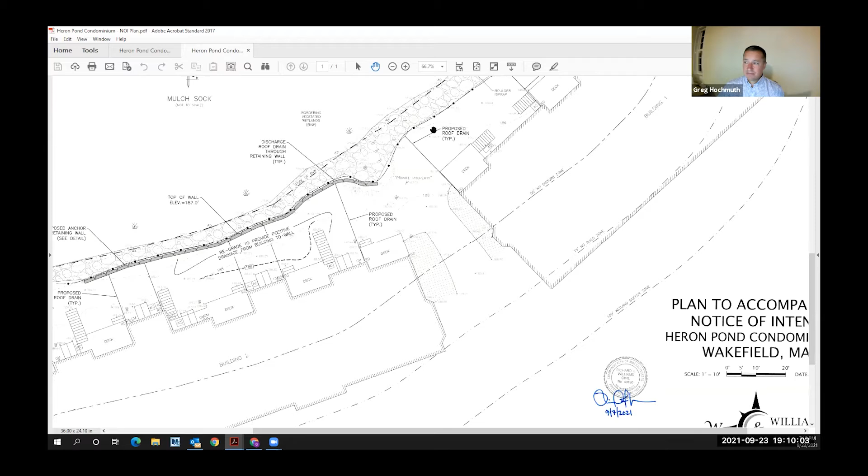So when you regrade, are you starting at the BVW and grading back to the house, elevating as you go? No, we won't be close to the BVW. We'll be close to the top of the wall, but the BVW boundary is pretty close to the toe of the wall where it meets the water in a normal season. So all of the work will be within the existing lawn area.

Will you bury the downspouts and have them daylight at the filter fabric area? Yes. So if you walk behind these buildings post-construction, you'll see the downspouts going into what looks like a subsurface infiltration chamber, but they'll just enter a pipe that extends out to daylight just before the wall. And how close to the BVW is that new wall?

Good question, let me zoom in a bit so you can see. I don't think I can annotate, but I'll use my pointer. So 50 feet from the wetlands is this line that cuts through the building. We're probably within 8 to 10 feet at the closest point, with the wall right here, set back just from the top course of the existing boulder wall that surrounds the pond.

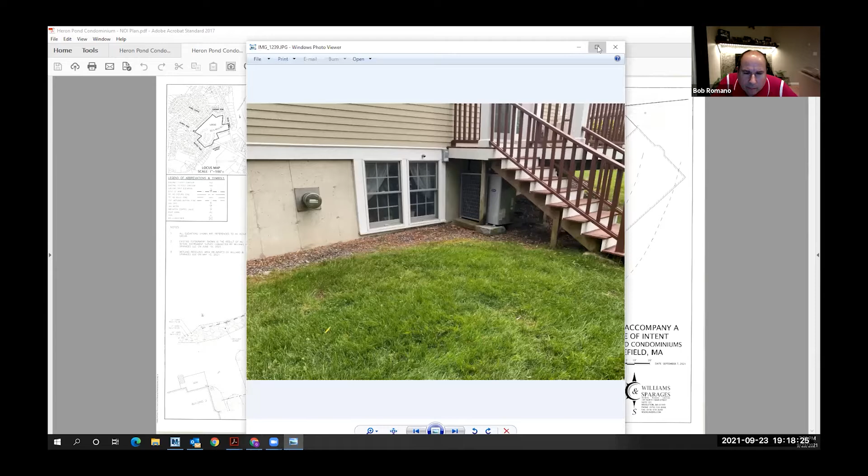Where on that drawing roughly is that picture taken from? This is a good one showing how it pitches back towards the windows. This is higher here and it's lower here. And at one point in time, the stone probably drained a lot better than it does today. Over the years it's probably got gummed up.

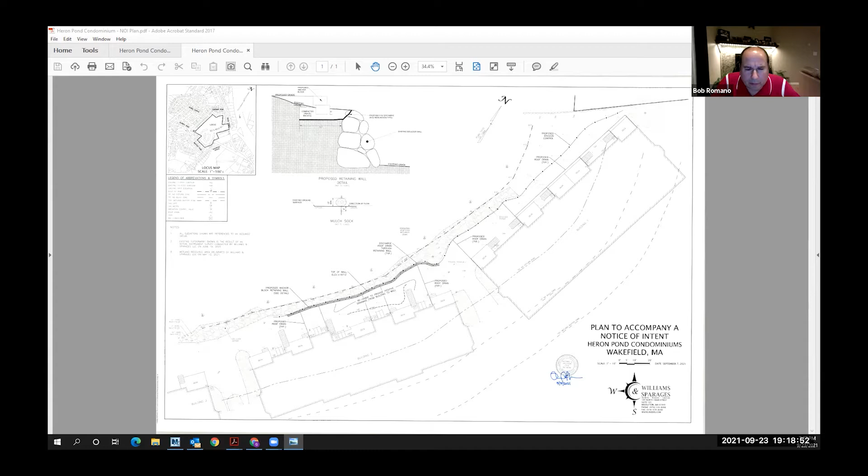Just going to keep going through these photos to see if I have a better one. So Greg, are you gonna take that high spot and move it, or what's gonna happen? So where we just saw that mound in the photo, that's gonna be flattened a little bit. We're not going to be cutting anything, we're going to be putting the wall in close to the existing wall and lifting the grade up a little bit. That'll allow us to kind of flatten out that area and make the slope uniform back to what it was.

Yeah, so it's going to be perfectly even until you get to the new wall. It's going to slope subtly away from the buildings. That's the idea - just get the water away, put the downspouts into a pipe, and daylight them closer to the resource area.

What erosion control measures are you proposing? So we wanted to put in a 12-inch diameter mulch sock, because we've had really good success with those. They bind to the ground. Straw wattles, in our opinion, don't work - silty water goes right through them. But this is going to be a pretty quick project. The company doing it will be in and out very quickly.

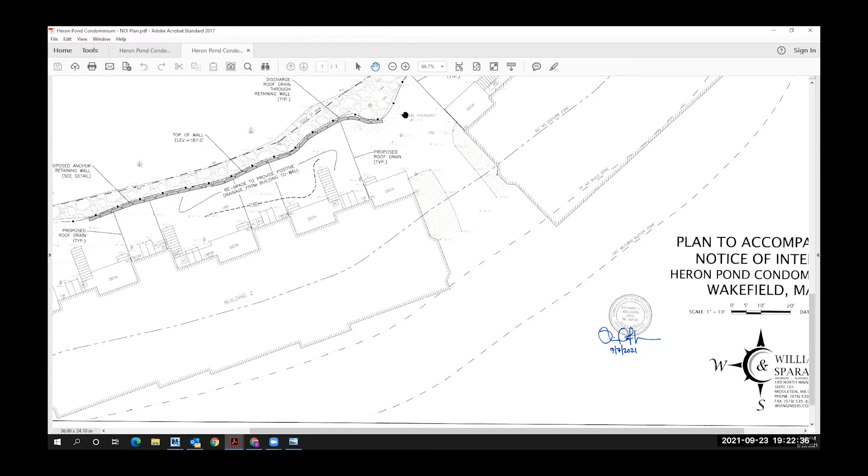There's going to be little trenches through there too, to bury the pipes for the downspouts. And how long a term - this has the potential, if we get some rain, to make a real mess. So how long do you think this would take? Oh, this will be done in less than a week, and the erosion controls will be in place to protect the resource area during construction.

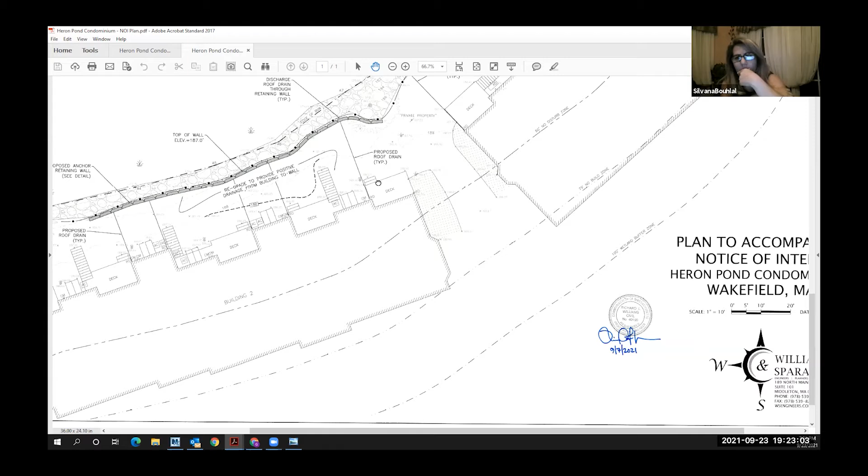I have a question. This retaining wall - if this is the remedial issue for this area, how is it not the case that the other buildings will eventually do the same thing? Or is it not? Is it going to be pretty much the same? Good question. I have a picture behind the other building, and I think you'll see it's much different over there.

I just want to show you behind that building you were just asking about.

As you go down this way, see how the wall stops? About a third down the building. And then the grade is just fine. This is in great shape over here. And that's the photo I was just showing.

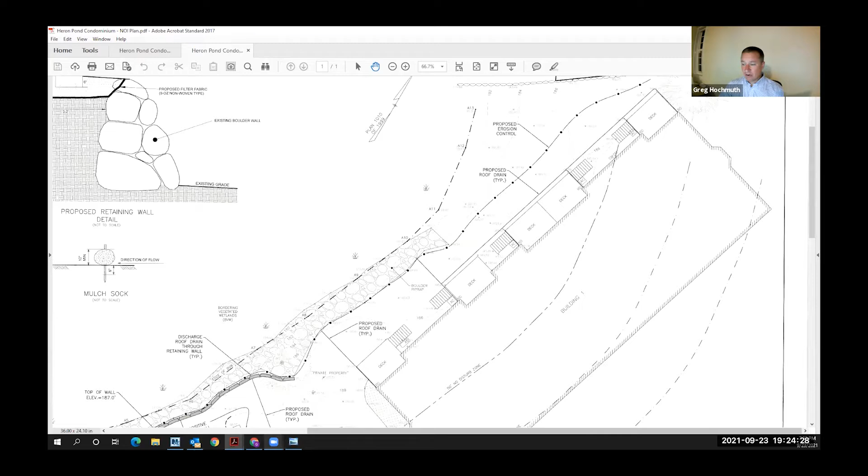Greg, how are you anchoring the erosion and sedimentation controls to the top of the wall? Yeah, so that mulch sock, the beauty of it is it doesn't require any anchors, stakes, or anything. Once you get a rainstorm, it's tough to lift that. It's heavy, and it binds to the ground.

A lot of people, after the project's over, if this was in the woods, we'd probably propose to just cut it, remove the fabric around it, and spread out the mulch. We can't do that in this location. They'll just cut it in sections like a sausage, twist it up, carry it, and remove it off site.

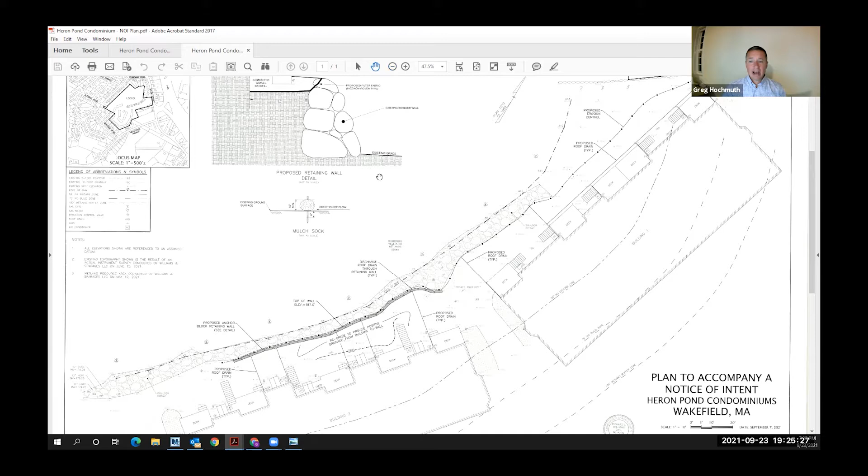This erosion control doesn't need any type of anchor. So it's going to be placed on the rock itself? Just in front of it, on the grass in front of the rock. Because remember, our...

But it looks like you're putting some fill right behind the wall. How, are you gonna? Pretty close to it. But the erosion control will bind, whether it's a rock or grass, whatever it's on top of. Nothing's gonna go under that once you get one storm event.

I don't understand, Greg, why you're building up the wall if you're trying to get the water away from the house. Because right now it's too steep. We have to add material back there to make it uniform and flat.

It slopes down. How can it be too steep? What, the existing lawn is too steep? Yeah, the wall has settled over the years. So when you come off these decks and steps, it's a very steep slope down to the wall now, and it wasn't that case when the development was first built. It's sinking. The wall is sinking.

How do you know that? Just from walking behind the building. I mean, it's grass now. It's going to be grass after the project. It's a buffer zone project. From our point of view, it needs to be done. It's a pretty minor project. They're not building anything new with the exception of this small wall.

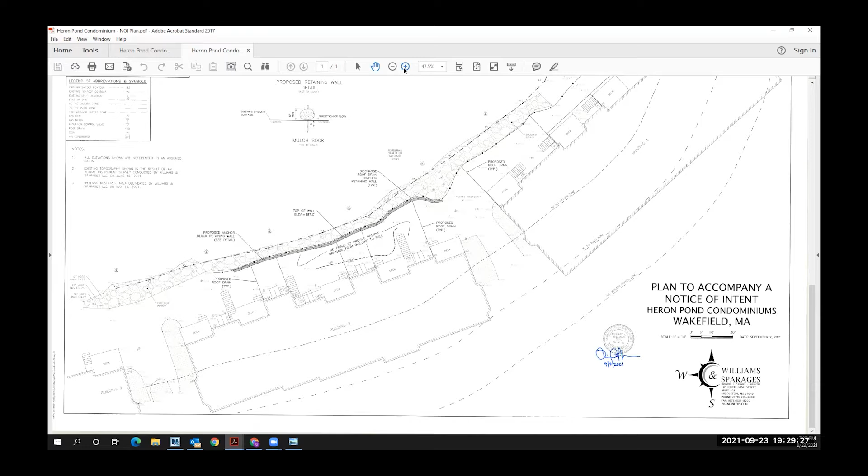Okay, well, you said you're getting water in one of the units. You must have to get it graded back to the foundation there. Where is that low? I'm sorry, I can't hear you. I said, you must have to bring some of it back to the house, change the grade at the house because the guy is getting water in one of the units. I don't know which unit it was. Well, that's why we're extending the downspouts away from the building.

I think getting the roof runoff away from those low points that are right up against the foundation - that's probably the culprit with the property owner that was experiencing some flooding in their unit.

So you think it's really from the roof runoff? Yeah, I'd say just about every unit behind this building, there's little pockets next to the bulkheads, the AC units, under the deck, where everything's just a little lower than the grass. I bet the stone used to infiltrate, now it's just not.

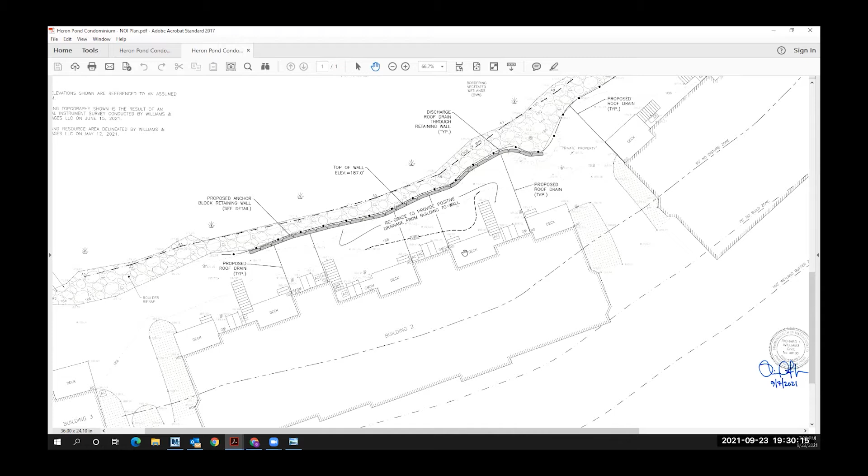I just ask, why not just extend the downspouts? If the issue is with the water getting too close to the houses, I don't understand why you need to bring in the soil and build - I mean, other than to stop that settling, I guess. But it's not to take water away from the house.

But why do that, again? You're in a buffer zone - I want to hear why you think that's better. Well, I don't think it's worse for the resource area. I think it's better for the property owner to be able to use their backyard - at one point in time they could a lot easier than they can now. It's lawn now, it's going to be lawn post-construction. Impact-wise to the resource area, I don't think there is any. I think somebody would be hard pressed to tell me how this is going to impact the wetland.

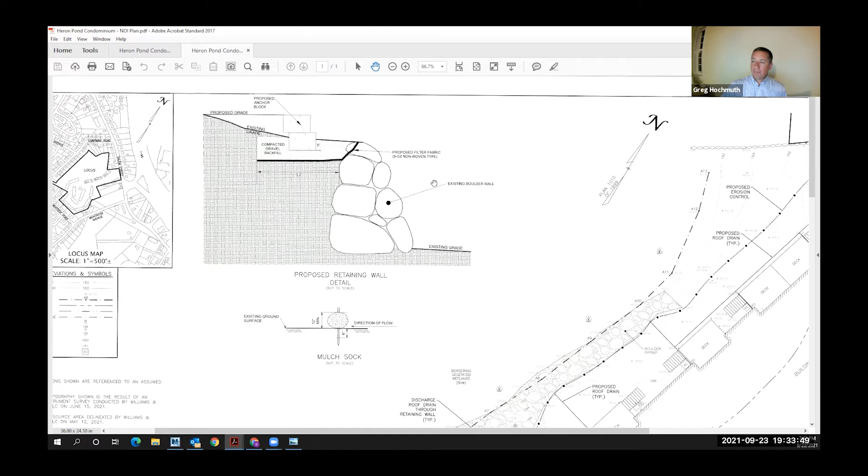So the way this is drawn, it shows the filter fabric going - really the filter fabric is gonna go up here, and this is just a generic detail. The erosion controls will go somewhere in this location. They won't be working beyond the erosion controls. It varies along the entire length, but if you look in plan view, we have the erosion controls shown as the limit of work, and we won't go beyond that limit of work.

Okay, because it seems like you're filling right up to the wall. I just don't understand how you're going to put those erosion controls in and then fill underneath it? No, the erosion controls are going to go in, and there's not going to be any work on the wetland side of the erosion controls. All of the work will be on the building side of the erosion controls.

No, I understand that. It's just that it looks like you're filling right up to the wall on the development side. I just don't understand. Could you provide a detail on how that's going to look when you anchor that in?

I know the generic details. So we have a mulch sock detail right here. Right, but that's just a generic plan on a flat piece of land.

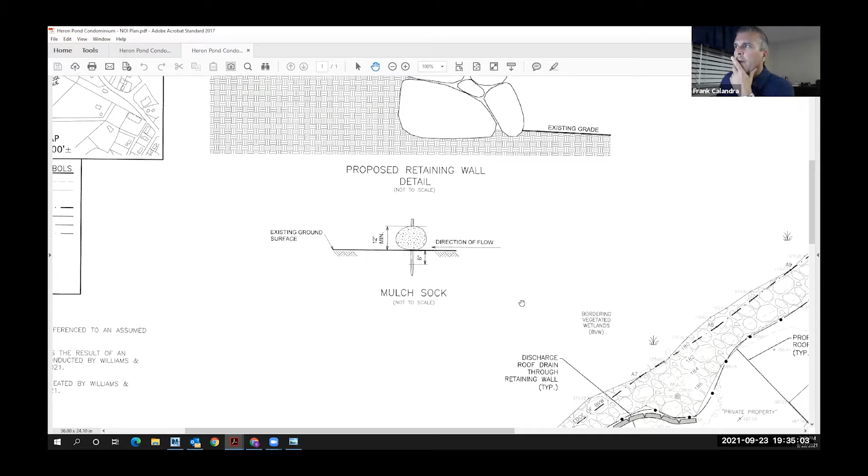I just want to see how it's going to integrate with the wall as you're going to anchor that in right at the top. Is that the plan? Because then it looks like you might not have enough room to do your erosion and sedimentation control work in this place. So if you go up a little bit to your proposed detail.

So the detail, this isn't to scale or anything, this is just to show you there's going to be no work beyond the erosion controls. I know what your concern is. They're going to put the erosion controls in, and any excavation is going to happen on the building side of those erosion controls.

Which is the indicator of the erosion control on your plan? You've got two lines there. It's the line with the black circle. Okay, so aren't you putting that right on top of the stones? In some spots, yes. So how, you really can't anchor it according to that detail.

I think that's what Frank is thinking about. But you don't need to, you've seen mulch sock before, I'm sure. You don't need to anchor it. We don't like mulch socks, we like hay bales. Well, we'll put hay bales in, but the mulch sock will work so much better here. Yeah, I'm just saying, it depends on the situation.

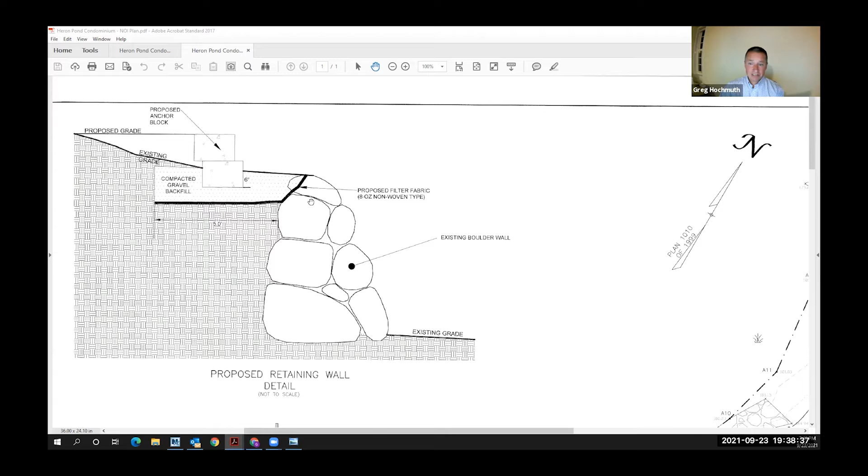You really can't do trench silt fence here, because you'd be trying to trench it into rock. And the straw bales, in my opinion, the mulch sock would be better, but if this commission would rather see straw bales - no, I was just putting that out there because we decide what we're going to use based on the type of project. Some projects are better with hay bales than others, that's all that statement was about. I think it's appropriate what you're doing.

I don't see anything. Yeah, I think our only concern really is the interim potential for sedimentation runoff while the lawn is being reestablished.

Yeah, I was wondering if there's a way you could sequence it so you don't have as much exposed until you get the wall built and then come in and grade, would that be feasible? Well, it's gonna be pretty quick. In less than a week they're gonna have this thing done. It would make sense to kind of do it all at once, just to get it over with quick.

Yeah, but if there is some concern, a lot of times what they'll do is hydro seed with a tackifier, or after they seed, they'll put down some straw over the seeded area to act as a tackifier. That helps knock down velocity, and if you get an above average storm event, it helps keep the loam in place so you don't get rilling. But remember, this is a pretty flat slope we're creating, so it's not going to be a steep drop off down to the wetland.

And what time of year were you going to do this? They want to do it as soon as possible, to take advantage of... well, we're running out of time, right? It looks like it.

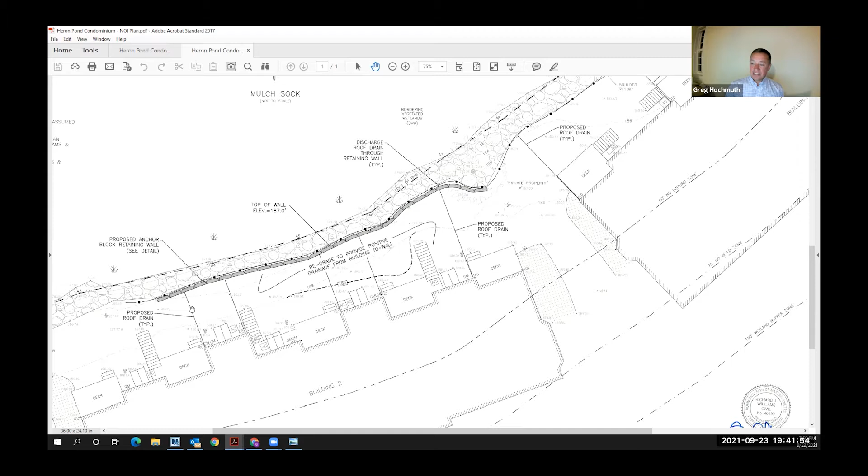We may have an as-built, this was like 2001 or thereabouts. It'd be interesting to know what datum they're on, because it may be a different datum than the one we're showing here. I think we're on NAVD 88. Yeah, that's what you should be on.

And we may have revised floodplain too, right? No, there's no floodplain here. There's no floodplain here? Okay, good. Let me just double check that. Yeah, surprisingly there's no floodplain associated with Heron Pond. There will be someday.

Well, there is an invert elevation. Yeah. Any other questions or requests? No, I guess not, right? It sounds like there isn't anything reasonable you want to see.

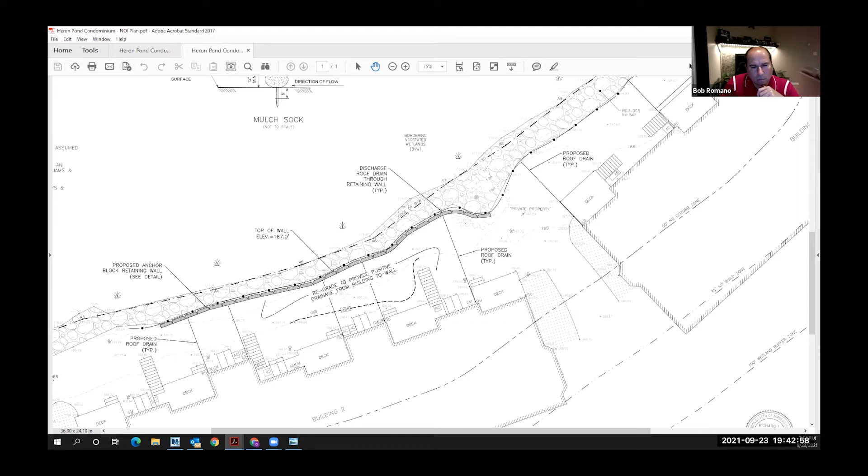Is the height of this wall gonna vary throughout this thing? Are you gonna have some more blocks than others? Yeah, as it tapers off towards the ends it'll go down to one block, but we've got the top of wall set at 187 for the entire length, which is about 1.5 foot above, you know, 1 to 1.5 foot above the existing top of boulder wall that's there now.

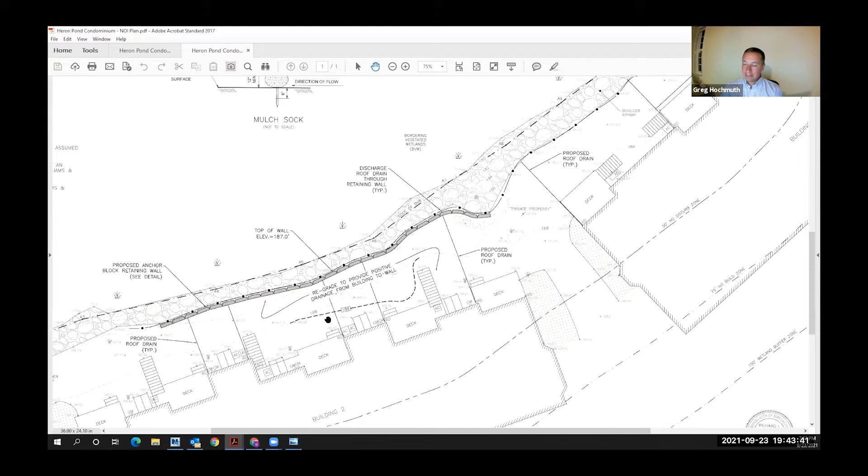If you just dumped loam there and tried to stabilize it, you'd get more settling over the years. You'd need to bring it up that 1.5 foot to 2 feet. But I don't know.

The filter fabric we're putting down below the gravel base should help any settling below the new wall. Shouldn't it be done settling by now? It's been about 20 years. So otherwise you're putting the wall in an area that's still settling, and if you don't know why it's settling, it's just going to keep going. That was the problem, right?

To figure out if it's done settling or why it's settling is a huge undertaking. Now you're talking about dismantling that wall along the pond. I think we have an as-built of that, and I bet we have a top of wall elevation for the existing one. I'm going to have Elaine look at the records to see how much it's really settled, if we're able to get that information.

What you're not going to see is all the pits and mounds when you walk behind that. It sounds like you're trying to smooth it out and just regrade it. Yeah, for the most part. It's not a big deal.

It's just the proximity to the wetland and the chances we're taking that we won't get heavy rain and make a real mess. A lot of commissions require a monitor if there's a predicted above-average storm event, or anything over half an inch within 24 hours, where they go out during or after, with emergency erosion controls on site, so if there's an issue it can be addressed right away.

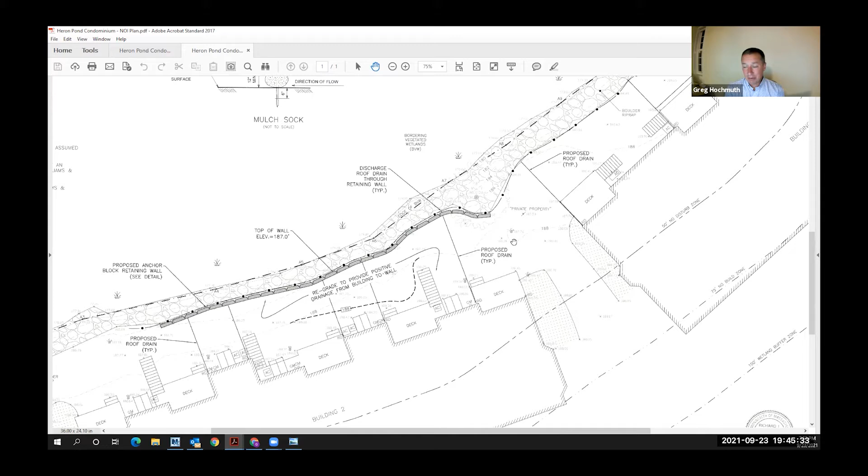This is going to be about a week to complete. You might have one storm event, you might have none, but having that required in the order may make sense here.

Any other questions or comments? I think I understand what he's doing now.

Are there any requirements we want to come back with in two weeks, October 14th? Next meeting, I believe. Is there anything we're looking for drawing-wise? I'm going to fix our detail. I want to ask Elaine, because she knows this project very well—we were both out there while things were happening, and she might remember or know where to find something.

I'll look through the files for the as-built plan and get the elevations.

Are there any questions or comments from the public?

If you're in that area too, it might make sense to just pop in and take a quick peek. It won't take long to see what we're trying to describe in those photos. That's not a bad idea.

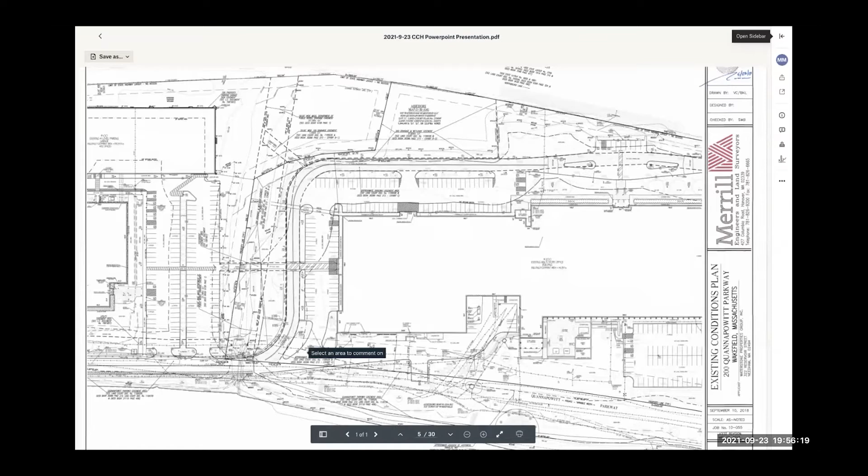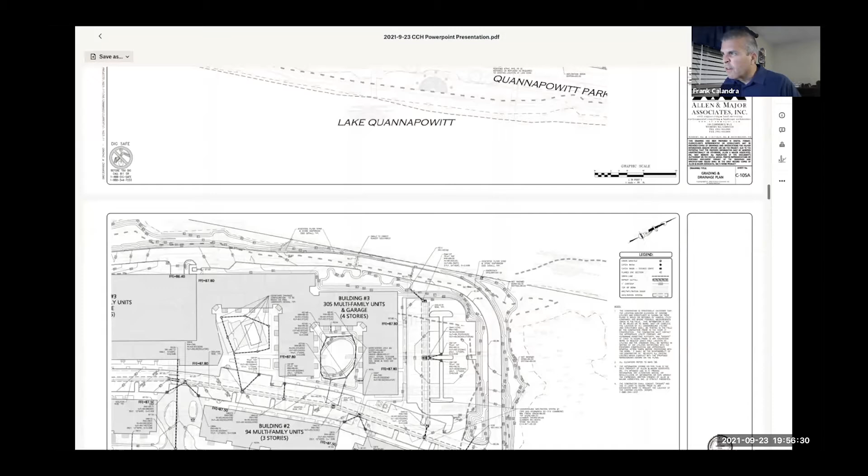You're not showing the right area of the drawing. If you go more to the left, there are wetland flags shown on 50 Quannapowitt. We can't accept a plan that has wetland flags on a different property.

Okay, we could - I'll talk with Nick and see if he's okay with removing some sheets from the plan, or you can put a condition in the order of conditions saying you're only approving the wetland lines on the site. We'd rather have it off the plan, it's kind of misleading. Okay, yeah, I'll talk with Nick, see if he's okay with that.

I apologize, what's the sheet number we're referring to here? Is it sheet one, EC01? Sheet one, sheet one, existing conditions. Exactly right.

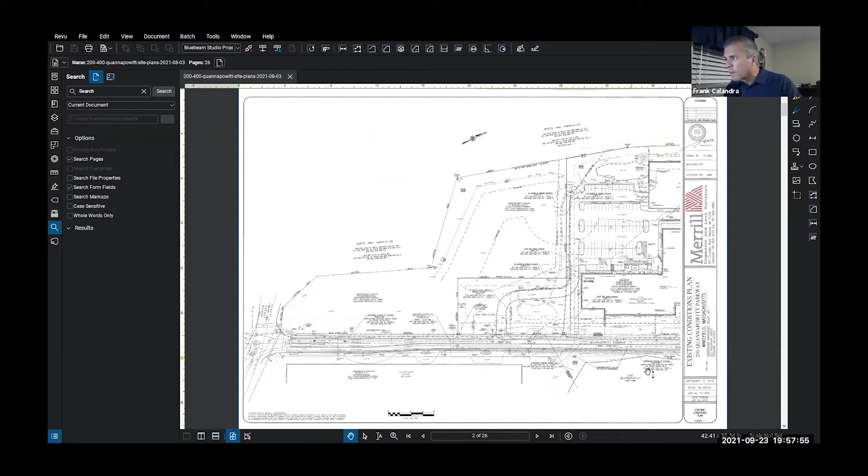I didn't have it in my presentation tonight, so I can't show it. Just for the sake of this conversation, do you mind if I bring that up really quickly? Let's see, I think it is this one. So if you look down here - I don't know why this is jumping, but it's right here, can you guys read it? Yeah, we can see it. So this is the other project that was in front of us not long ago, 50 Quannapowitt Parkway.

It looks like the site isn't even on this plan at all. I think you can delete this plan entirely. Yeah, I think it's totally extraneous, there's no reason why we need to have it on here. The only reason it would have ever come up is these sites were all created together, and Beal had a survey that was originally based off of. As Mitch mentioned, for other purposes it's relevant to have the utilities, but for these purposes there's no relevance to those sheets. Okay, we can remove those.

I just wanted to help Jim make his point there. Thank you. Yeah, thanks for bringing that to our attention.

So I'll share my screen with the site that we're going to talk about. Mitch, you're muted. Sorry about that, I'm not sure why, for some reason at this Wakefield Concom Zoom meetings, they make me hit an extra tab telling myself that I need to be able to speak while I share the screen.

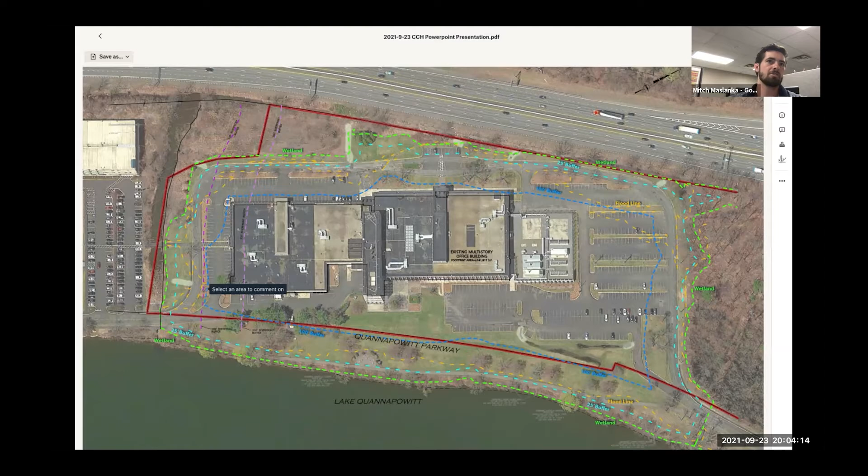And within the 25-foot to 100-foot buffer zone, we have 1,000 square feet of degraded surfaces, which doesn't actually sound right, so don't take my word on that one. But regardless, there is quite a considerable amount of degraded surfaces within the buffer zone at the moment, and the proposed project is proposing to reduce those degraded surfaces within the 100-foot buffer zones.

Other work proposed within the 100-foot buffer zone are the proposed building structures, portions of which are going to be up in this area right here. Within this landscaped island, there's going to be a building footprint, and the reconfiguration of the parking lots here will result in a landscaped island here, but some impervious surface here from the building.

Over here, there's a similar instance with the parking lots to the right of the screen, where these landscaped islands will be reconfigured so that there's less degraded surface in the parking lot and more landscaped islands and vegetation instead of impervious surfaces. So I'm going to scroll down.

This is our proposed plan, so you can see more clearly what is going on with our proposed buffer zone. Like I said, building here, reconfiguration of the parking lot so that there's more green space here, building footprint sneaking into the 100-foot buffer zone here.

And then in these areas where there's lawn space, and lawn space here, and lawn space on the outside of Quannapowitt Parkway, those are proposed to become our wet basins to manage stormwater runoff from Quannapowitt Parkway. So runoff is going to flow from the parkway into our best management practices, that being the wet basin, to manage stormwater before it reaches the BVW.

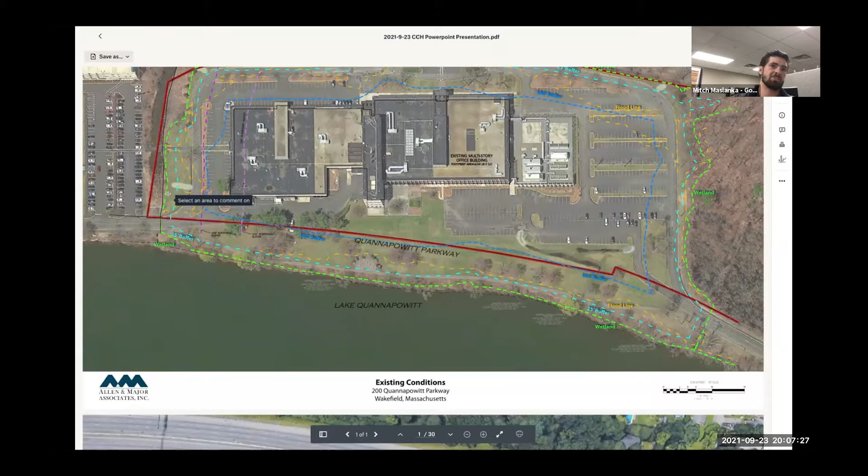...that the paved swale actually extended into the BVW and was filled with 6 to 8 inches of sediment. So over the years, stormwater has taken sediment from the parkway, parking lots, and landscaped islands, and has flowed down those swales and filled in the end part of those swales. Same instance over here - this was paved basically right up to the wetlands. But right now, you wouldn't know that without digging a test pit.

For these other areas, I didn't pick up on any asphalt swales here, here, here, or here. It was just dug ditches, basically, that carry the stormwater into the wetlands in all these shaded areas.

You had asked if any remediation or restoration of the wetlands would be necessary after all those years of sediment being brought in there. After checking out the site, I would recommend that no restoration be done. The vegetation is quite dense and honestly thriving in those areas. The biggest concern would honestly be the transport of that sediment and the nutrients to the surface water that collects in the wetlands and eventually makes it to that intermittent stream, ditch, and then eventually over to here.

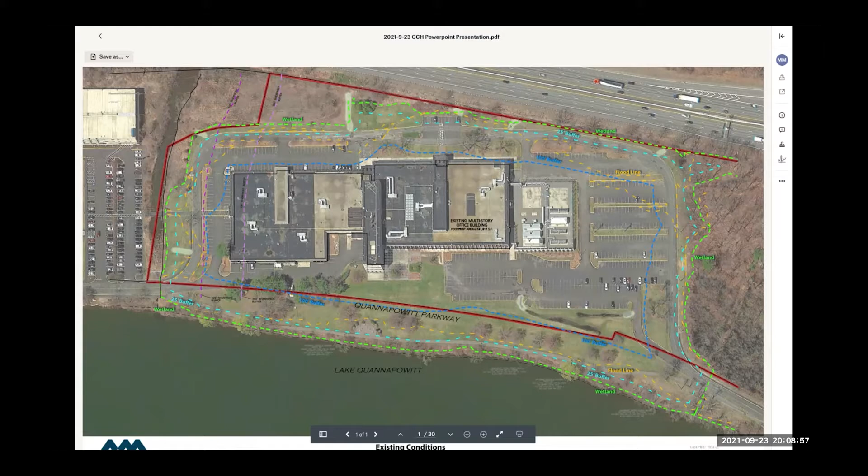So what would stop that is our stormwater management infrastructure proposal to turn these areas more into wet basins than swales, preventing sediments and nutrients from flowing right into the wetlands.

So I'll go back to this one.

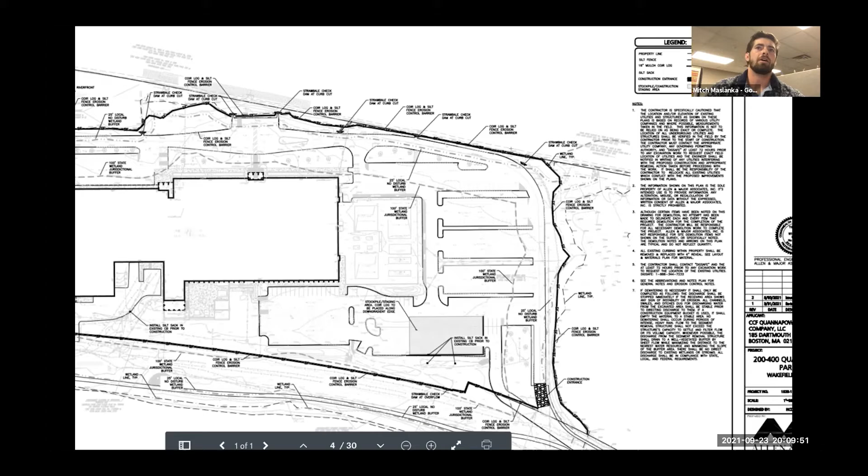Here is our site plan showing our proposed limit of work. As you can see, we have silt fence and coir logs proposed along the wetland boundary, going just outside the wetland boundary and extending all the way around the site. That's that dark black line - our silt fence and coir log for erosion control during construction so that there's no sedimentation.

getting into the wetlands. This is silt fence and coir log as well. We also have these straw bale check dams at the curb cuts where I referenced all those swales bringing sediment in. We're proposing straw bale check dams so that the sediment and the water can hit these check dams and sediment has a chance to dissipate and not flow into the wetlands anymore or even hit our erosion control. That's why those check dams are going to be there.

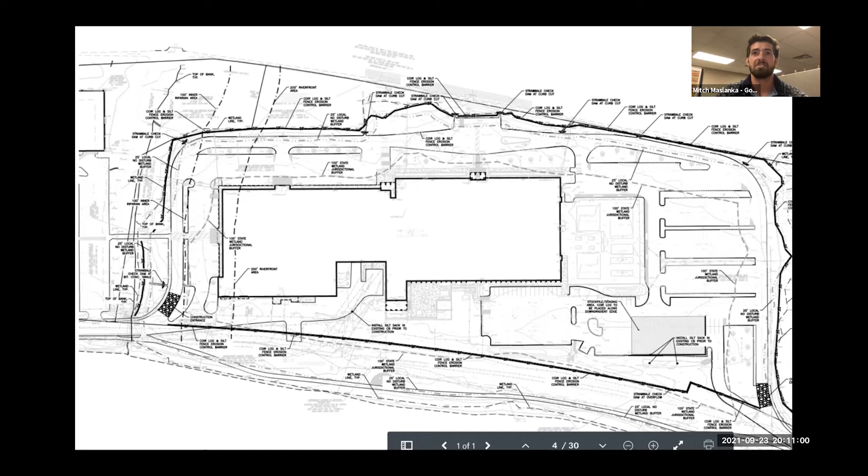So we're really taking it seriously with the erosion control, making sure that no sediment makes it to the wetlands, especially in these areas where we're going to be working up to the boundary so that we can make those wet basins. The wet basins are shown on this plan right here.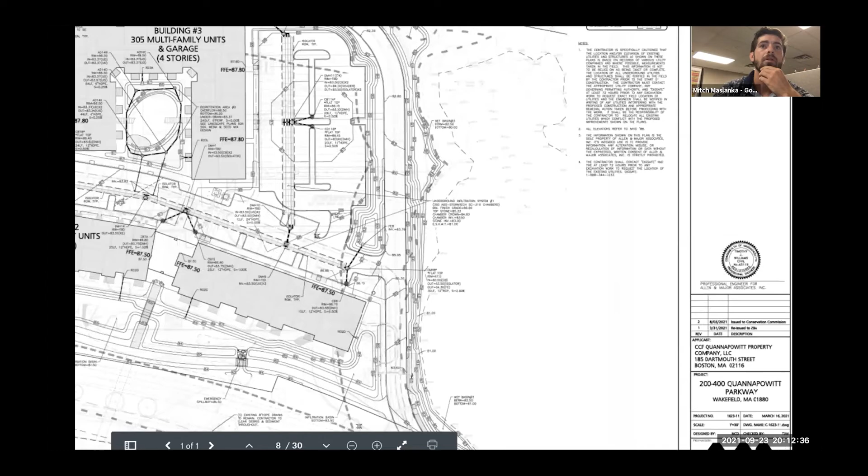And then on the next sheet, it shows the other side of the plan. So down here, we have a wet basin, and wet basin here, and wet basin here.

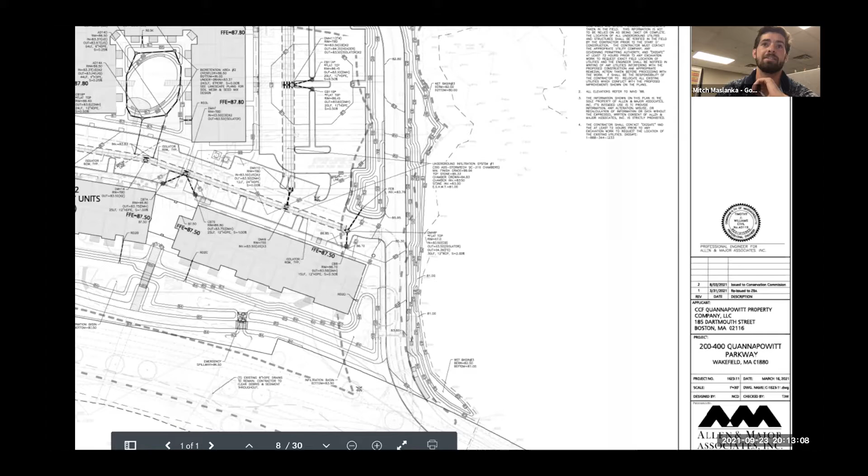So grading is going to need to occur close to the BVW boundary, but in the end, that's going to be improvement to the buffer zone there, because instead of water flowing off into these areas, the water is going to settle within those wet basins and not bring any sediment or nutrients into the BVW anymore. So the grading is necessary. The wet basins are going to be a big improvement. So that's the main portion of our work within the buffer zone, is doing that.

And there's even some depressions in our landscaped islands that are going to be collecting whatever water is draining out of these subsurface infiltration basins that are going to be treating the stormwater from the roadway in the middle of the site and directing stormwater into these tinier basins in our landscaped islands, which are within our 100-foot buffer zone. So that's why I'm noting that.

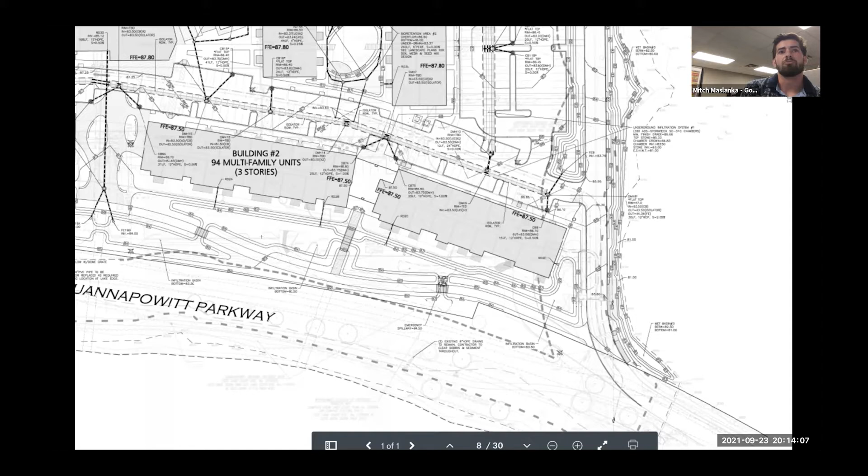As for the area closest to the lake, there's not much work that is going to be done within the buffer zone as far as grading goes or impervious surfaces go. As you can see, there's just some minor grading here to make room for infiltration basins that are going to be here and here outside of the buffer zone.

Most of the buffer zone here is on town property. We are proposing invasive species control up along the edge of the pond where natural vegetation is right now, right along here. So that is going to be an improvement to our buffer zone as well, removing those invasive species, creating more natural habitat for native species.

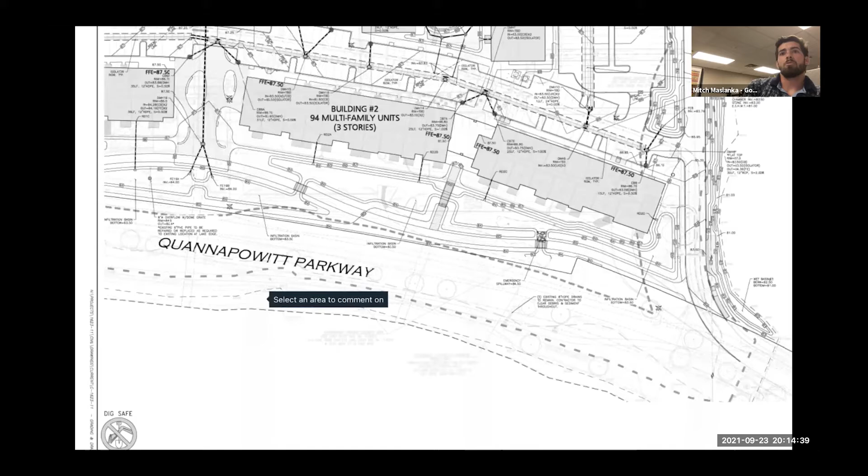So that concludes my discussion on the wetlands and our impacts to the wetlands. So if anyone has any questions, feel free to ask.

I have some questions for you.

Your plan shows at the perennial stream, it crosses under Route 128, correct? That is Route 95, I believe. All right, 95. Yep, right here. I know it is 128, but so you have an invert elevation there of 76.58 according to your plan.

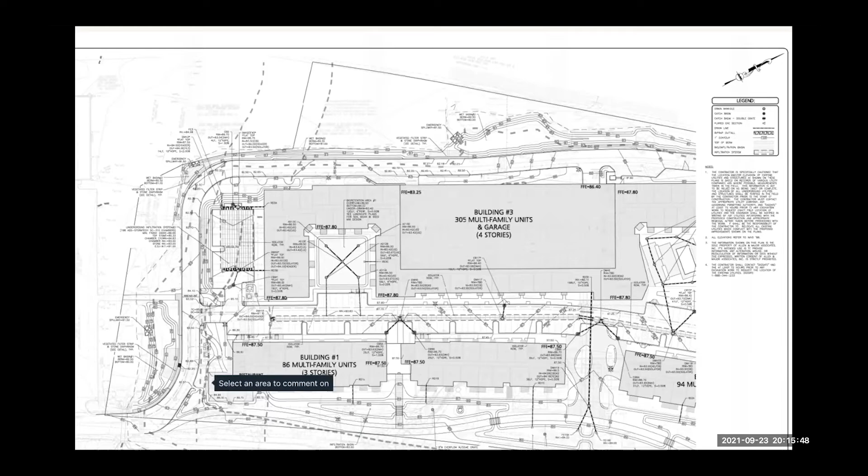And where Quannapowitt Parkway is, at that culvert that goes to the lake, you have an invert elevation of 79.9. And you have one other elevation on here over by north, on the north end of the project. There's a 24-inch reinforced concrete pipe, which has an invert elevation of 80.32, which also crosses under the highway.

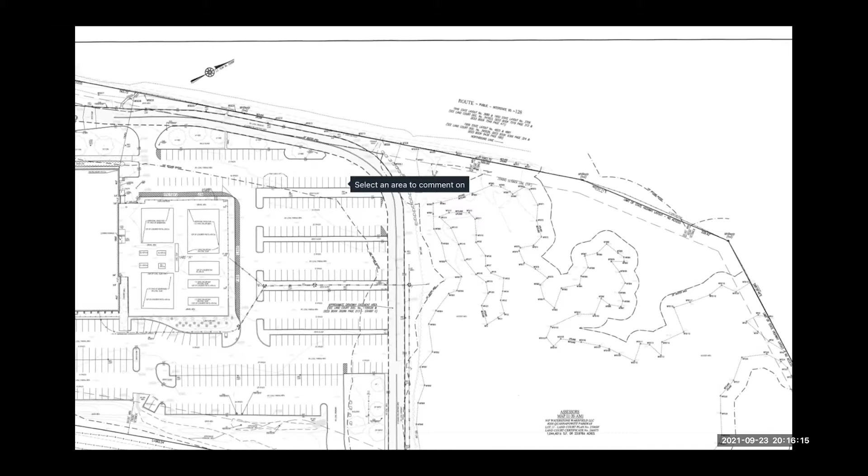How is this section functioning? Because which direction is the water flowing in, or does it flow in both directions? Because the invert elevation at the lake is higher than at the highway. And if you look on your drainage study, you don't extend your drainage area under 128, which is hydraulically connected through that pipe.

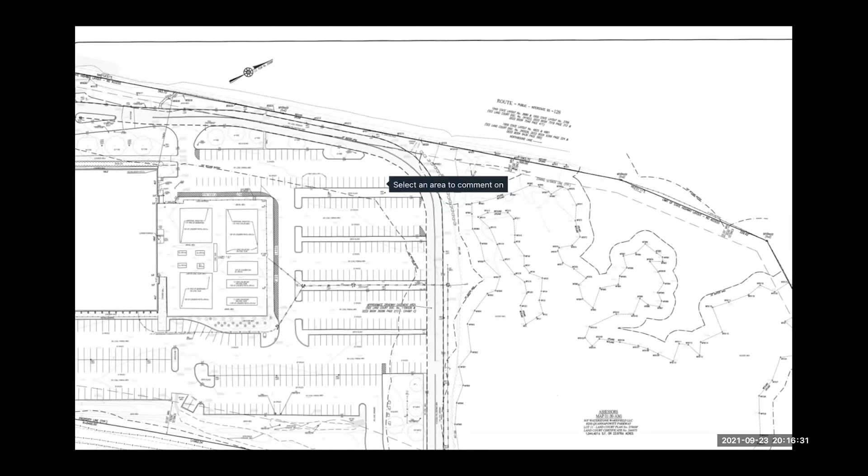So could you clarify which culvert you're talking about? Are you talking about this one here? Where, you got your pointer there somewhere? Yeah, it's in the bottom left-hand corner, Jim.

I'm talking, let me tell you what plan I'm on. I'm on sheet 2 of existing conditions. Is that what that is? No, this is not. Can you pull up sheet 2 of existing conditions? Okay. Yeah, give me a second here.

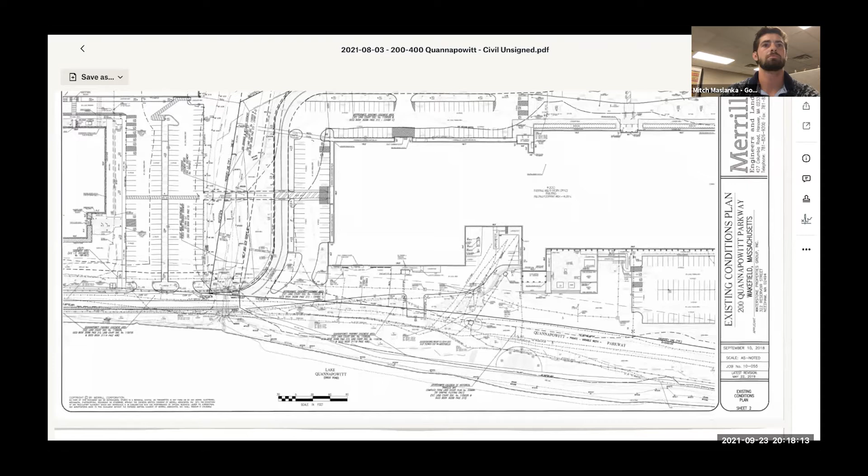Okay, it's gonna be really hard to see this. Because none of these plans show contours that I can see, and also I think we're very deficient in elevations. You need some plan here that's got elevations, which I don't see.

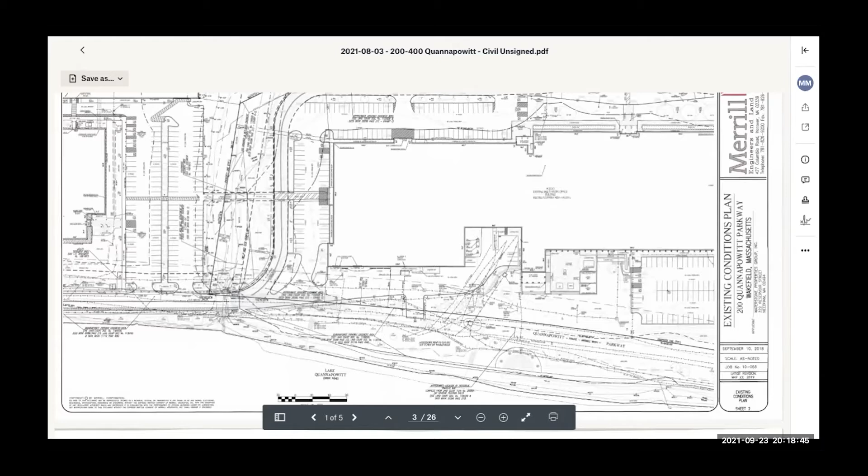But if you could go back to that drawing, sheet 2, I can point out where. So if you look at the intersection of Quannapowitt Parkway, right down in that area, if you expand on that, there's a contour down there, or there's an invert elevation that's down there. And this is part of the problem. You can't read your plans.

So I mean, I can't see it even on this, so maybe you're not gonna be able to make it work, but that's what you have for an elevation. At that location, it's 79.9, which is higher than at the 95 highway. So that would kind of imply that the water is flowing out of Lake Quannapowitt.

You also, if you could push that down again so that you can see where it goes under 128/95. I can't read that. I don't know if you can read that.

Well, what is the direction of flow? I thought it was flowing into the lake. Well, I don't know. That's what's confusing me. And if you go, can you zoom out on that? Mitch, you're on, it looks like you're trying to talk, but you're on mute. Sorry about that, I gotta just hit that button again.

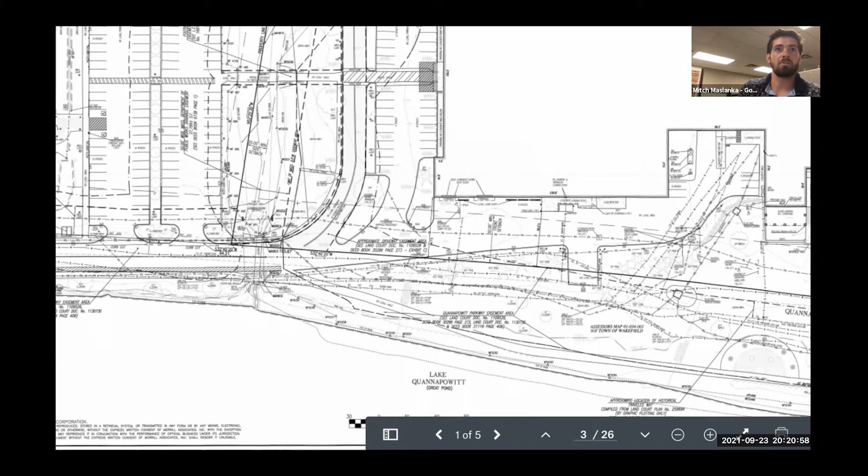Well, I don't know. It doesn't seem like it could be going into Lake Quannapowitt. But where's your drawing that shows your drainage areas? You had it all broken up. Was that in the? I don't have that.

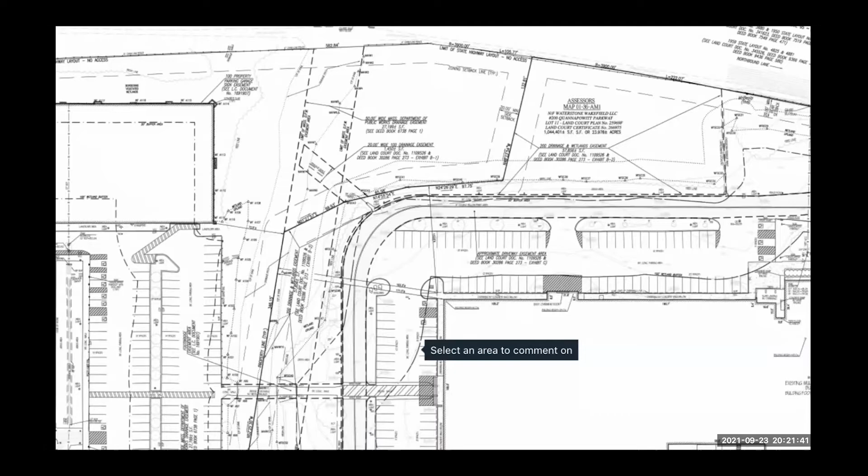Jim, did you see elevations that show the outflow end being higher? At the lake, it's higher than at 95. So I wonder if there was settling at the other end of the pipe, if it's actually dropped.

Wait a minute, I've got the map right here that shows the drainage study where they're dividing up the water. Jimmy, if it helps, I just pulled them up and I circled the invert elevations you're talking about. I'm not sure if it's Zoom or if it's the plans that are being used. Do you want me to give it a shot? Because I think I know what you're talking about.

You want to share the screen? Yeah, let me just show you what Jim's talking about. Yep, and let's see if this works.

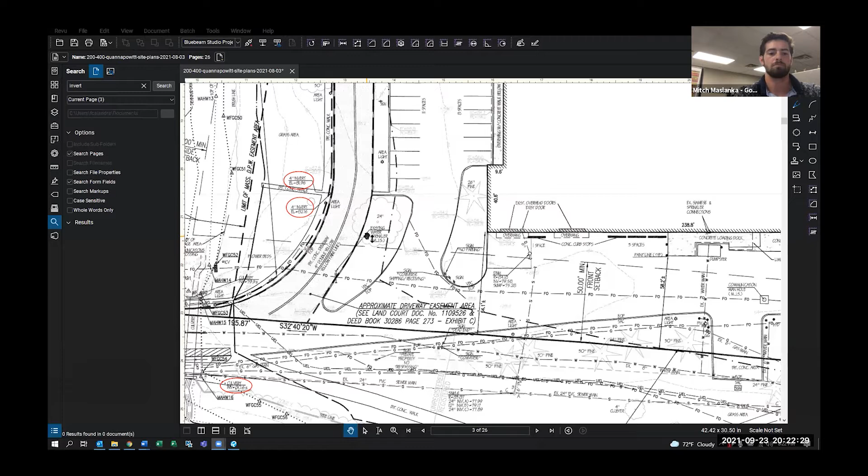Can you see that in any better detail? Oh, yeah, you can see it. It's got, yeah, you can see it. Wow, that's a lot clearer. All right, so invert. Culvert invert 80.6.

Where do you see that? This is 80.6 right here. Right, but at the other end it's 79.9. Yeah, again even midway I have 82.16 here and 81.96 here. Well, that's not, I'm talking about

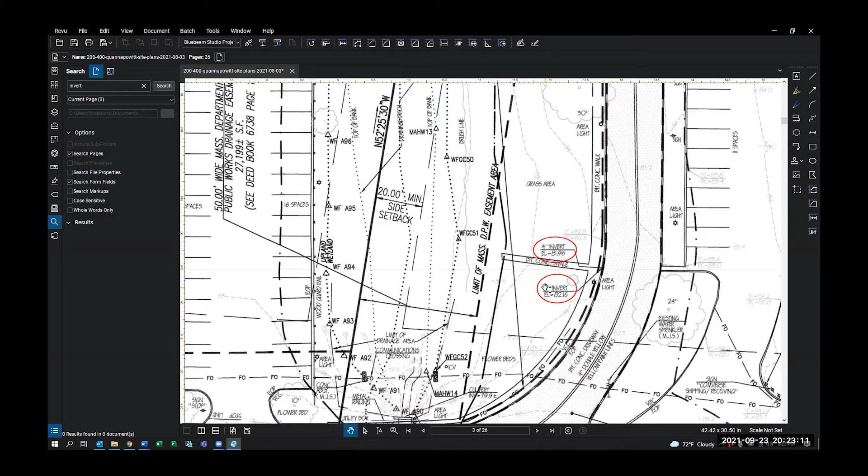where it crosses Quannapowitt Parkway, both ends of that culvert. But then if you go all the way up to 95, right up at the top corner, top right-hand corner, that's the culvert. It gives you 76 point something.

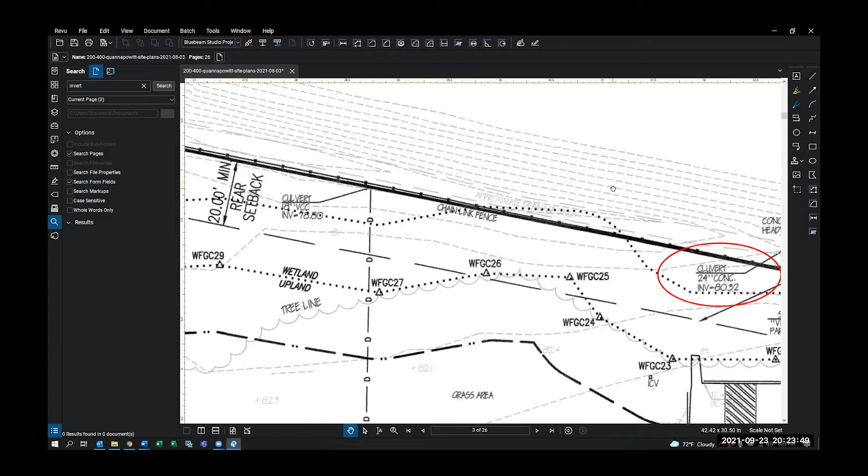Yeah, 76.58. Right. Now if you go further north with the drawing, you're gonna see there's a 24-inch pipe that I think goes under the highway as well. Is that the one you're talking about? Yeah, 80.32. So it almost looks like everything is heading towards 95.

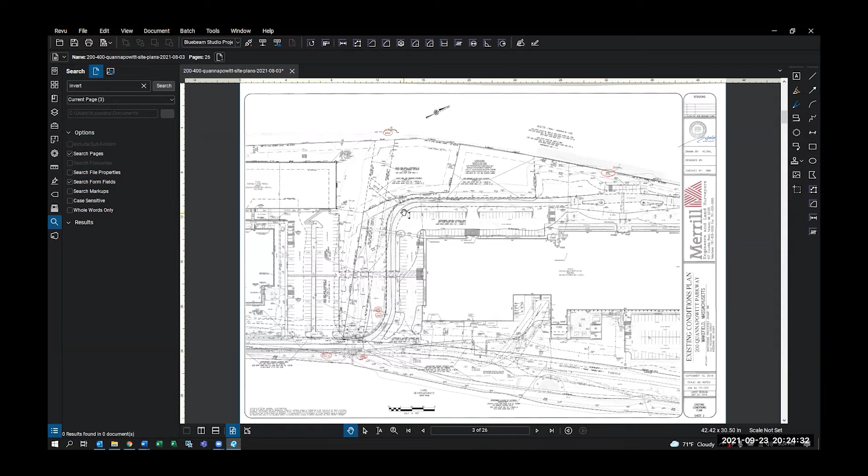Because that culvert, you can walk it heading south and see where it turns into a bigger kind of channel, but I don't know how this thing is all connected. I don't know how this perennial stream connects. I think it connects back around to the lake, and I don't know how you address something like that with your plan that shows your drainage area, existing watershed plan.

So if I could share the screen one more time, I could show you stream stats, which shows the watershed coming all from above Route 28. Just give me a second, I'll share my screen.

Okay, can you see this here? Yes. So this is the stream stats report for the site. This is where all the water in Reading basically goes, and portions of Wakefield. It all eventually makes it down to our site where that river is. So this is the watershed.

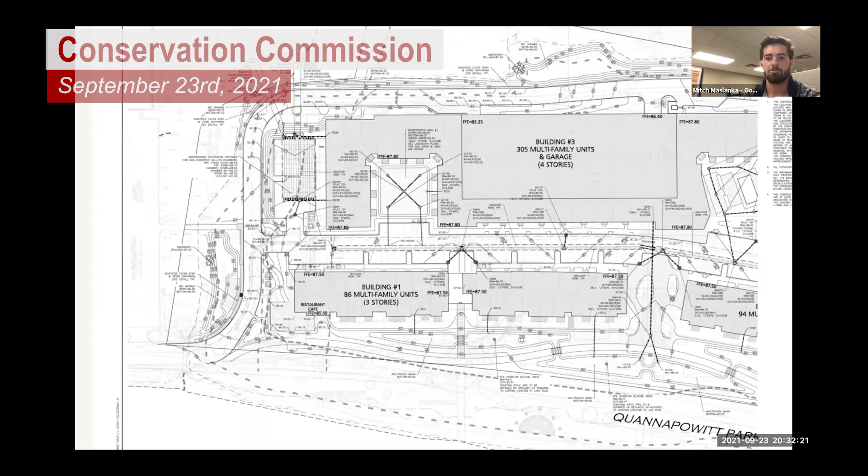Well, it's regularly maintained lawn. Since the lawn is mowed once a week, there's not much sheltering habitat. Foraging is negligible, that's an argument you can give as far as why you overcome that burden of proof. Not just telling me that, I would like to see something in writing, explain to me how you came to that conclusion.

I could write something up for you, but for impact within BVW buffer zones, there's no performance standards that even mention it. But the regulations say that proposed work undertaken within 100 feet of a specified area, 310.10.02, hereinafter called the buffer zone, which in the judgment of the issuing authority will alter an area subject to protection under the regulations, is subject to regulation. So, I mean, we are allowed to- just because you're not in the BVW doesn't mean you couldn't possibly alter a wetland, and we are allowed to regulate that.

Okay, yeah, I hear you. So perhaps it might be best if I tell you what the wet basin is and how it's going to be better than the lawn. I am interested, I would like to see how that works.

So these wet basins, if you see my screen, we have wet basins proposed in all these lawn areas. What that's going to entail is grading down several feet so that we create these ponding areas, so that water will flow into these ponding areas and sediment will be able to settle over time while the water is detained in those basins.

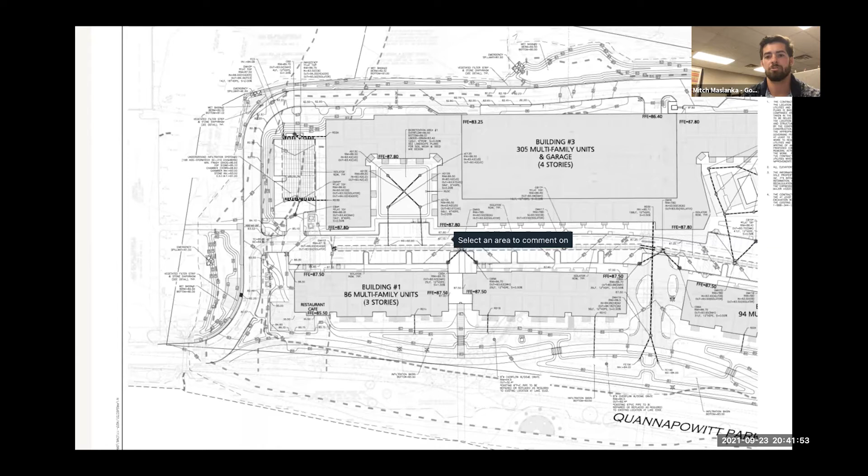So my redevelopment report is coming out soon. I'll explain in great detail why that is an allowed use within the 100-foot zone. There's a lot of allowed uses, but it also says it may be allowed by the commission, so I don't think it's a given just because it says it can be done. I'm pretty sure it says it's an allowable use. Yes, it's an allowable use, but it's allowable within our jurisdiction. If we allow it, it's allowable.

I think maybe some of these conversations might be better off pushed to the next meeting. I talked to Rebecca earlier today. I believe we're in the process of pulling in a consultant to help us through some of these issues.

Elaine has all the information on that, so we should talk about it now. Elaine, are you with us still? I am, and I spoke with Rebecca about it, and we both agree on BSC. BSC has done a lot of riverfront work. We find their name frequently in the DEP superseding orders of conditions, so they do have experience on riverfront issues.

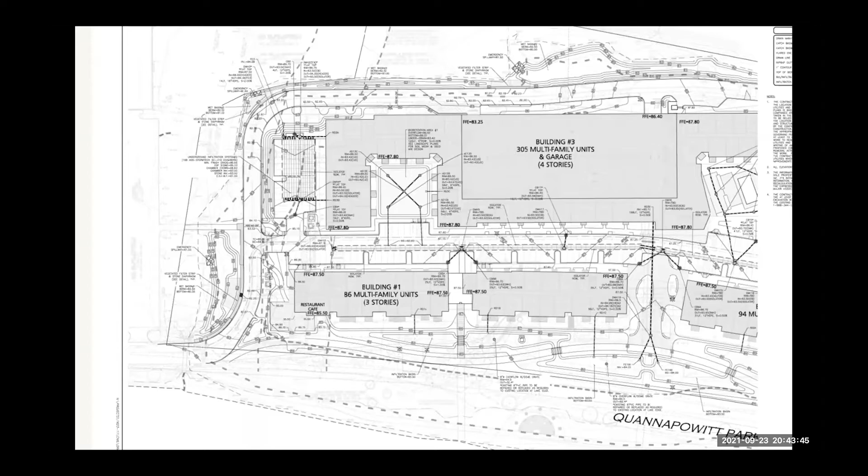I called them this afternoon and spoke with someone there. I explained briefly what the overall concept and issues were, and she said they would be happy to accept a peer review if the commission should vote it. She said, if that were the case, please send me the information, and once I take a look at the filing I'll be able to put together a price quote for you. So they're ready to go, and they are the recommended firm from both Rebecca and me.

Elaine, what's the full name of the company? Oh, I don't know, we just call it BSC. I'm not even sure if it has another name other than the initials.

Well, we had to put together a scope of what we're looking for from them. So the question is how much of this you want them to review, whether you just want them to do the riverfront and the buffer zone. I spoke with Bill Renault last week and asked him how he felt about having a peer review of the stormwater.

He said that he'd been working with the applicants for quite some time now, and he felt that his review covered a lot of the stormwater issues. He said he would prepare a review from the engineering department for you, and since stormwater seems to be what's next on the agenda for the hearing, I will have that for you, or he will have that for you by the next meeting.

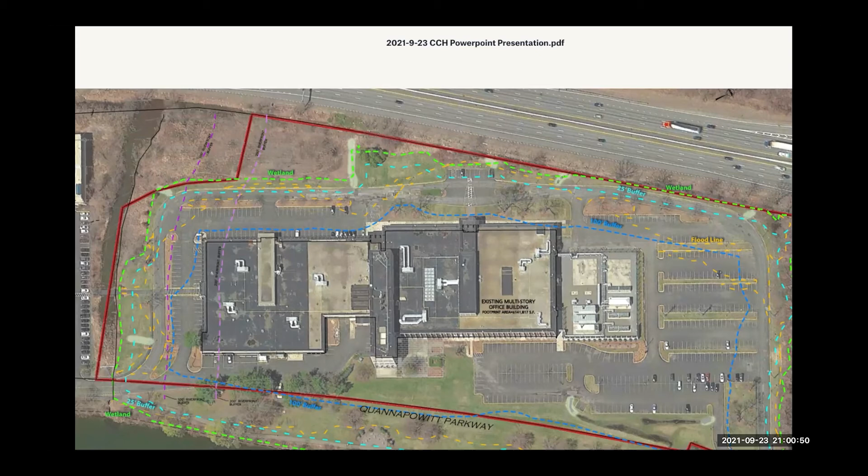If I can draw your attention to that stream on the left there, the one Jim pointed out, the elevation was actually higher here than there's a drainage ditch that comes down here. Now, is that stream drawn to scale? That's an actual photograph, an aerial photograph. Has anyone been down to look at that? Yeah, I have. And does that seem right to you?

I noticed that at the 95 end, it's a lot of open water. And as you get further down, it gets more congested. I actually wondered how they mark the riverfront, the top of bank on that side, because it doesn't necessarily have to be a bank. It could be a lot of other indicators of bank full. I don't know what they used, but I think the black line is showing the top of bank. Well, I mean, some of it I think is correct, but I'm not 100% sure.

I tried to see from on top of the parking garage. I believe this is either very early spring before any foliage is out, because it looks like the trees are bare. Well, I mean, I seem to remember that was a lot wider. I wish I had pictures to show you, but Dennis, it looks pretty wide right there.

Is this water? Oh, that's the water. Yeah, correct. Oh, okay, now I understand. So this stream is actually this wide. It's about as wide as the parking lot, right? Would you say that, right there where it comes under 128, Route 95?

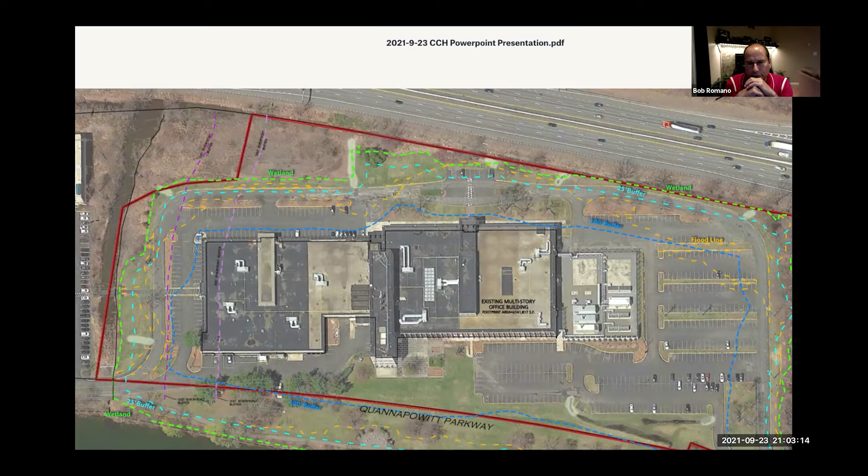Oh, okay, thank you for pointing that out to me. Now, my understanding was, let's see, I don't know how to go and film. How do I do that? I don't know how to hold something up. Is there a way that I can get on, have my picture up here? How do I do that? You can, are you trying to share your screen? Yes, yes. You can do that.

Down towards the middle of your screen, there would be a share screen option in the middle. Oh yeah, right, thank you very much. Now what do I do? It comes up. You need to have selected what it is you want to share. Oh, I was just gonna hold my camera up, turn the camera on and hold it up. Can I do that? No. Let's see, oh, so wait a minute, you actually have a picture, a hard copy of a picture you want to share with us? Yes. Oh, so yes, you could take your webcam and put it on the picture, though I don't know how well we'll be able to see that. Okay, I guess I'm gonna have to practice how to do these things. We'll send Jimmy over, help you out. So is it?

What is the point you're trying to show us? That used to be what is known as the Ash, Eaton, and John Street brooks that come together as Walker's Brook now. That's how it's known, as Walker's Brook. My understanding was that it used to flow into the lake. Is that correct? We have heard that. We don't know if that is accurate or not.

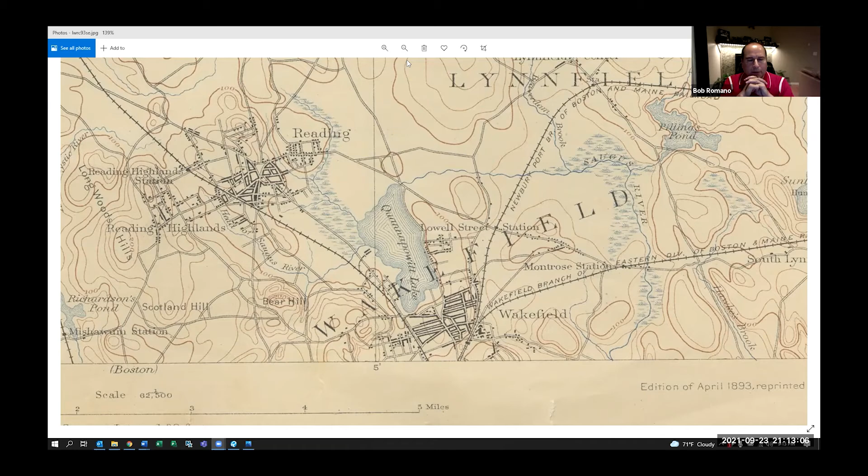The only effect that might have on this project is - I don't know, is there a Rivers Protection Act in effect? Isn't it something about 200 feet back from a river? The river we're talking about is considered a perennial stream. That's part of some of the discussion we have had.

Can you build within 200 feet of a stream? I'm asking. Well, there's already development there, so you can rebuild. Yep.

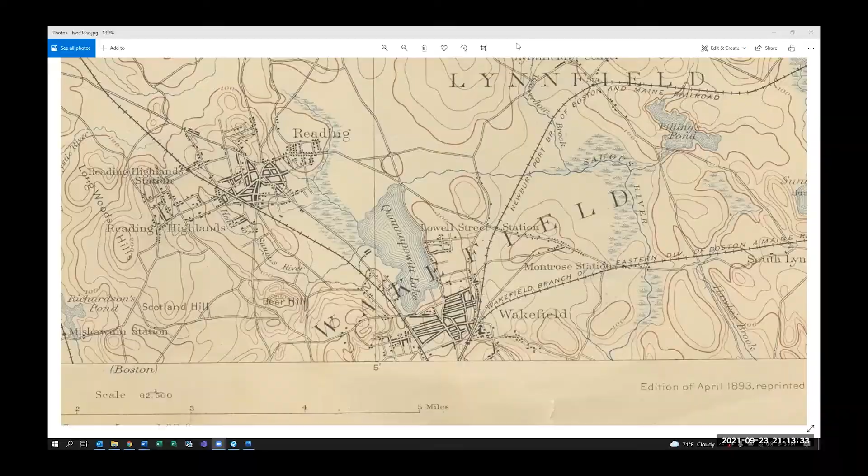Okay, I'm not totally clear on the point that you're making.

It sounds like you're talking about a loss of inflow to the lake that once was present. You're basically redirecting a river, a stream, because it doesn't enter into the stream. Bob McLaughlin did an article about them pushing snowplows, pushing dirt and snow into the culvert there. And when the lake freezes every winter, the ice pushes the sand up, and then when it thaws it comes back and refreezes and pushes the sand back up. So you wind up with dams under that culvert if you don't clean them.

I think if you could use this lake the way it was designed, it would be clean, the water would be clean. I don't know if you have a responsibility for this or not, or if they need a license to build from it.

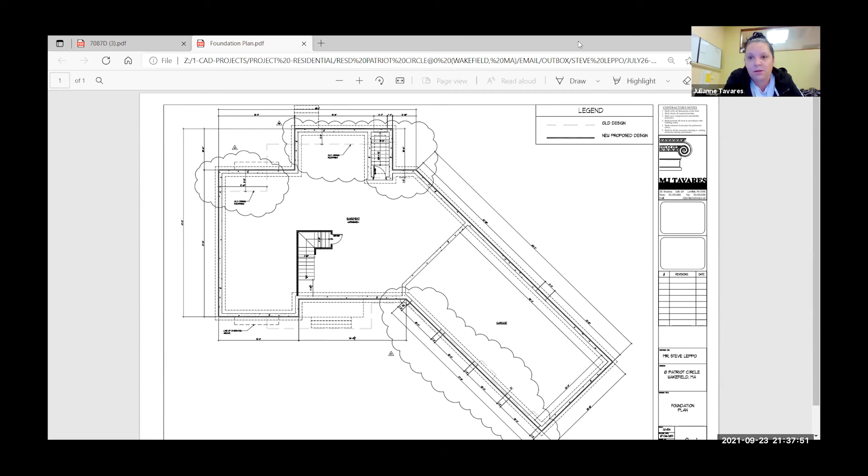And then to show you the plan—oh, that's helpful, that by the way was very helpful to see. Sorry, this is so tough. Okay, so there we go.

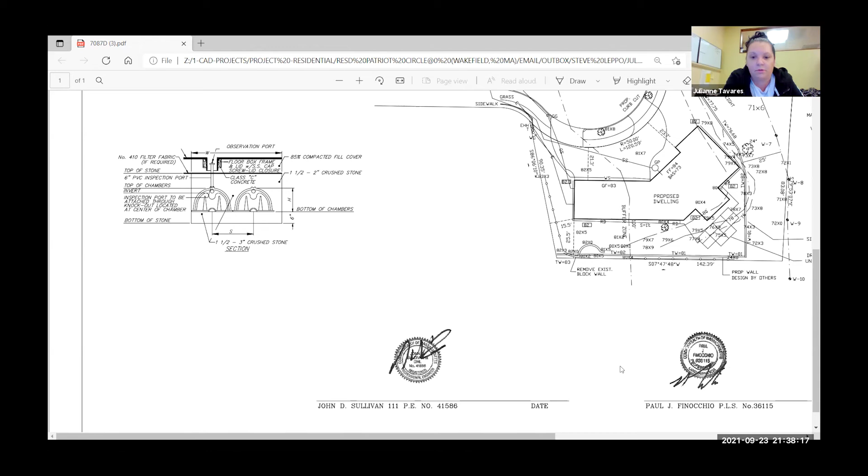So then this is the engineer's plan, and let me scroll over. Don't see anything again? Oh, again. Yeah, okay hold on, I don't know why I have to new share every time. It's strange, but okay, now we're good, right? Got it. Okay, so here is the site, let me see if I can—okay.

So this is that retaining wall that she was discussing right here. The 100-foot buffer zone is this line right here. And I believe the 25-foot... where's the, let's see, I don't even think it's on here. But the 25 goes to the wetland W5, W6, and that goes to the retaining wall, 25. Okay, so we're protecting that. The scope of work is just trying to add a little bit right here and a little bit back here. We're not out of any other setbacks or anything like that. And this retaining wall is kind of protecting it. We didn't go anywhere close to that, other than what was already approved. Okay, and that's it.

I'd like to make a motion, do we have to vote on this? Yes. Could I make a motion that we consider this a minor modification? So moved. Do we have a second? Second. All right, all in favor?

Frank? You're on mute. Or he's deliberating. I'll leave that up there. We'll move to Ken. Yes. Jimmy? Yes. Teresa? Yes. Silvana? Yes. Peter? Yes. And back to you, Frank. He's still on mute.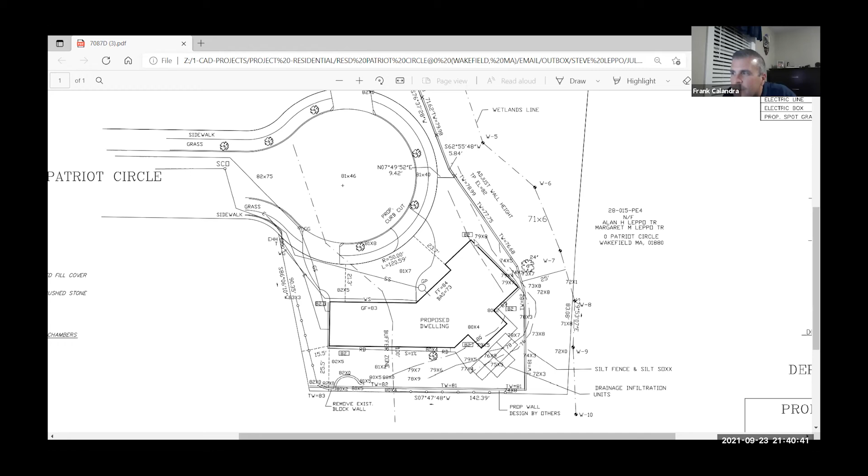Just raise your hand if you approve. Okay, approve, very good. And I also approve. Okay, minor modification it is. Can you guys hear me now? Yes, now we can. I'm entirely locked out, I can't unmute myself. So did you approve or were you just unsure of yourself? I got a thumbs up. Okay, sorry about that. I still can't. So we're all set. Great, thank you guys. All right, thank you. Thank you.

All right, Elaine, next you have the certificate of compliance for 200 Corner Parkway. It's the old filing. Right, so there's a block on the certificate of compliance that says no work was commenced, which is correct for just such circumstances. And Rebecca told me this afternoon that Jim had some questions about whether or not it would vacate any earlier wetlands delineation.

So the only thing I could find was a reference under an order of resource area delineation, and that's good for 3 years. So the accompanying wetlands delineation is good for 3 years. There was nothing I could find anywhere. I looked through the MACC handbook, the regulations, that would change the fact that a wetlands delineation is good for 3 years. So it seems to be good for 3 years, no matter what the surrounding paperwork does. Okay, that's good to know.

All right, so then we need to vote also on that, right? To issue a certificate of compliance for 200 Corner Parkway. So is there a motion to issue that certificate of compliance? I make the motion. Is there a second? Second. Okay, Frank? Yes. Ken? I would recuse myself. Oh, that's true. Savannah? Yes. Peter? Yes. Teresa? Yes. Jimmy? Yes. I also vote yes.

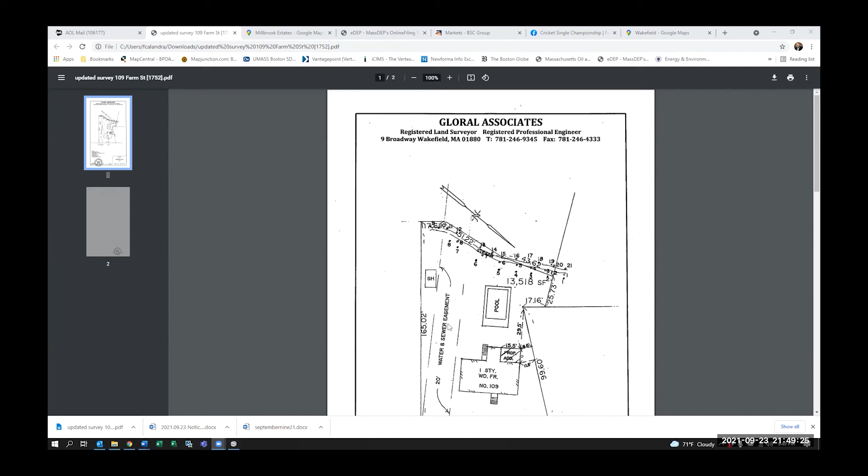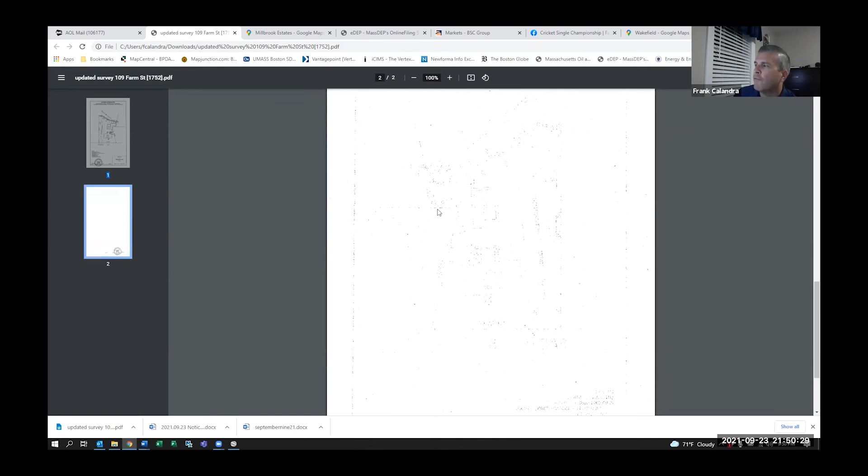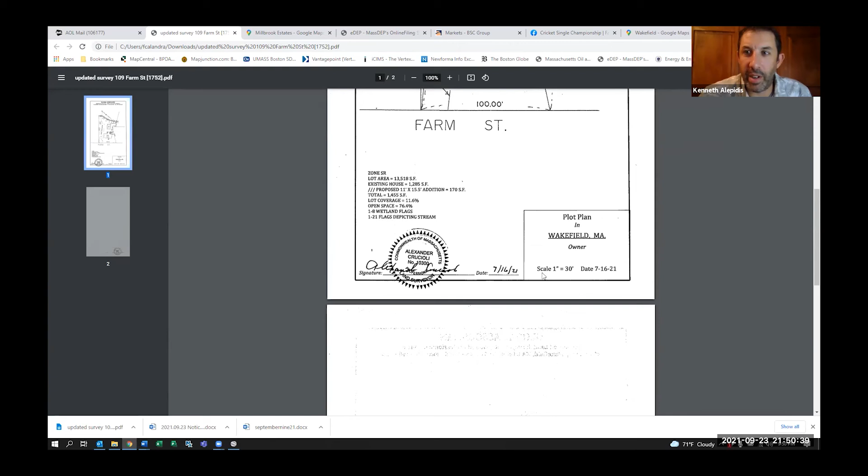Thank you, easier there than on my phone. Did you guys get a second page on that? That was kind of funky. No, I didn't get it. Looks like a backwards stamp. It's weird. It's just basically a mortgage plan, the flip side of that plan. Yeah, that's what it was. It's very faint. Was there something here, you think? Yeah, it's gotta be, because he's got a stamp on it. So there's gotta be some kind of content. But it looks like it's the back, the wrong side. I think it's bleeding through, yeah. It might be a see-through, two-sided copy. I don't know if it's a bleed through, but I think it was that page, probably his stamp bled through. I think that's a mirror of this page. If you flip this around, that stamp will fall right on the stamp. I think that's what you're looking at. It's a two-sided copy, the back side, double-sided copy. Oh, that could be it too. Yeah, I see what you mean.

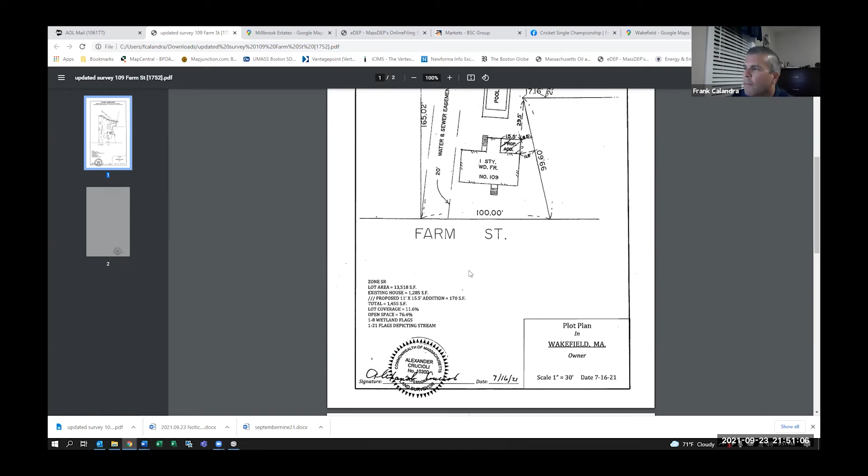Yeah, we actually walked this property, or the one next to it. What number Farm is this? It was this one - we talked about piping the stream on the... Exactly. Which Rebecca said isn't going to be an option.

So they're adding a small addition in the corner, and the pool's already there. They just got a building permit and didn't send it to conservation to get the stream setback variance. I mean, it's pretty flat back there.

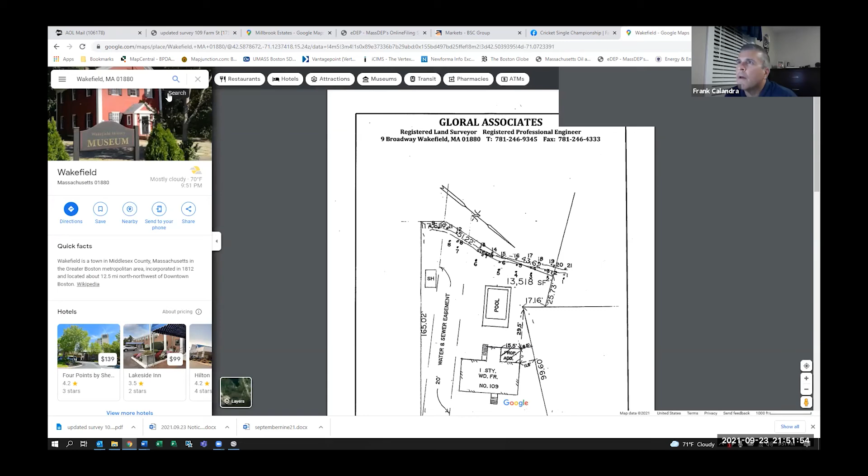That stream continues along the back of those houses, then makes its way under Farm Street. And then Jimmy's old house runs right alongside that - what number Farm is that? 109? Having some issues here, can you see Google Maps now, or are you still looking at the plan? Yes, we see it.

Is that correct? Yeah, that's it. So the stream follows that tree line in the rear. And as it gets to Farm Street, you can see it's much more wooded - that's where it goes under Farm Street and crosses. It is piped prior to the group of trees, I think.

So the pipe daylights, I think, on 109. That's correct. Wasn't there someone who had an oil release and it came down the hill?

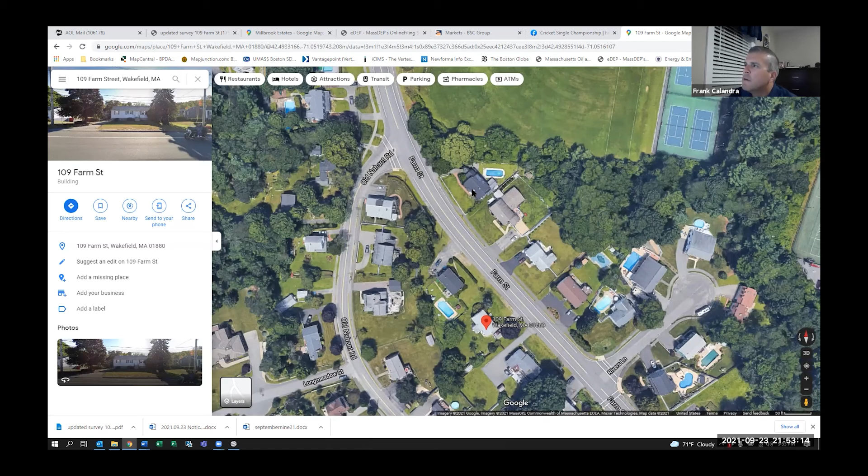Was it this person right here? That was on Old Nahant. Yeah, no - it came down and he's getting oil in his pool from the groundwater. Jimmy's old house - that's Jim's old house, yeah. Oh, it is? Okay, I don't know why I remember that. I don't know if it was that house, but it was further. It was that house, okay.

Wait, this is 109 Farm Street? Yes. Yeah, I think, Peter, you may have walked it with us.

So what are we doing now? Are they submitting an NOI, or just asking that this - they want to know if you'll accept the plan they've submitted, because they hand drew the addition on it and had the plan stamped apparently. Or do you want a whole plan done? Well, I think this is sufficient.

It's a 15.5 by whatever addition, squaring off the corner of the house. So you're going to be at least 50 feet away from the stream. No, they're not - it's 30 to the corner of the property, and another it's 25, right? What did you say, Judy?

Rebecca said they were closer than 50 feet. It says 29.5 to that corner of the property. Right, that could be right, I agree. And then the property line on the right of that is 25 again. Are you talking about the pool? The pool, yes - I'm sorry, the pool, not the addition. Oh, but the pool's existing, you said. Right.

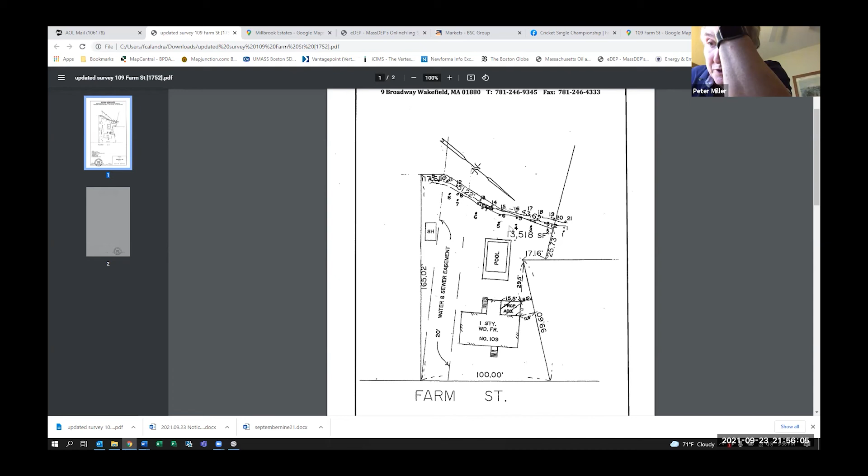What's the story with the setbacks on the side? That's not our problem, right? So I don't understand, Judy, what's the building commissioner gonna do? Nothing - they got a permit for the pool. The homeowner didn't do anything wrong, they got the permit, so they just didn't file with us. Right, because they said they didn't know. I don't know what the situation was, but the building inspector at the time didn't say you need a permit from conservation and didn't tell them they needed a variance. So it's too late for that.

I think I'd want them to add the distance of the pool to the stream. They can handwrite that in, but I think that would be good, useful information. I agree with that. But I do remember it's pretty flat back there.

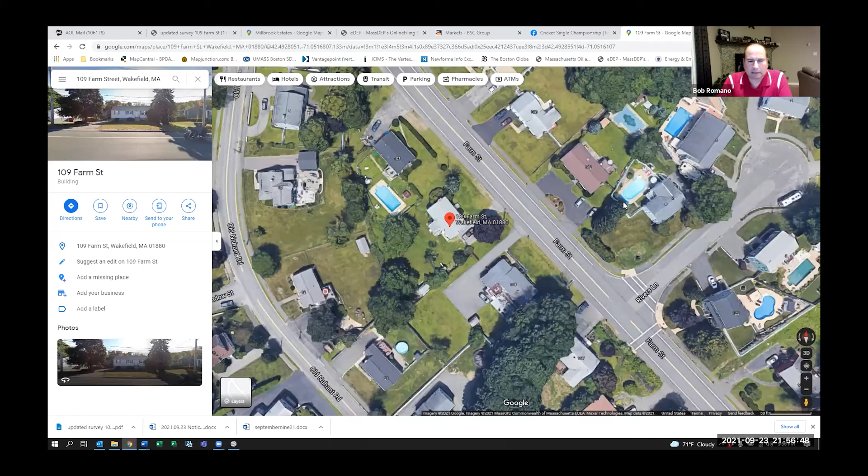Right side of the street. This one, right? Yeah, that's it.

So they're gonna file an NOI. Yes.

I mean, if it was just the addition, we'd probably say that it would be a negative determination of applicability. How far is it? Well, it's 30, 40, 55 feet away, approximately.

Did they cut down that big tree that's there? Is it gone? Looks like that's where the pool is. I'm looking at the satellite picture now. It's old, maybe old, I don't know. I don't see a pool on there. This one must be older, it was put in 2018.

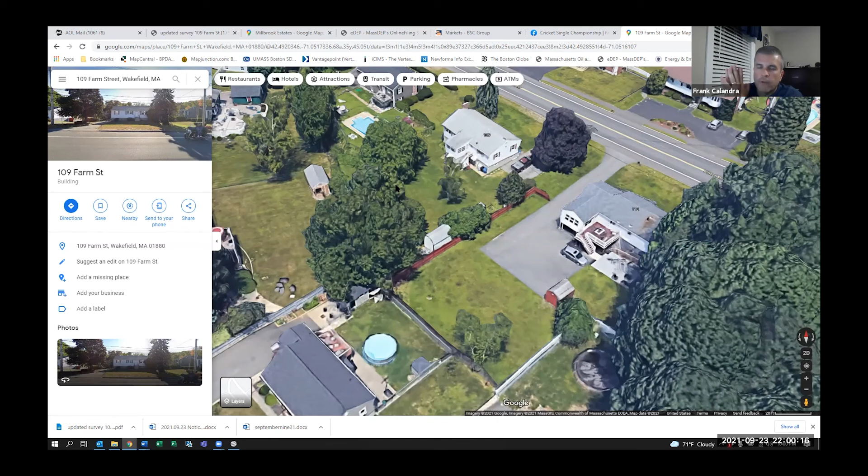We can ask them to show where the old trees were and what trees are still remaining on that plan, although it's gonna start getting pretty busy.

So I want to add here that we went out to that property some years ago because this man had requested that the stream in the back of his property be piped in. So I talked to Rebecca about it today, and she said when he put in the pool, he was of the impression that the stream was going to be piped in, so he didn't really foresee that the pool would be too close to a stream, because he thought the stream was going to go into a pipe. So that might explain some of the distance.

Well, once they file a notice and get before us, we can do a site walk. Is it a chicken and egg thing though, that if they're asking us to accept this drawing, are we to make the filing and then go out there and not be satisfied with what we see? They're just asking about the plan now, they're not asking us to rule on the NOI, they just want to know if this plan is good enough.

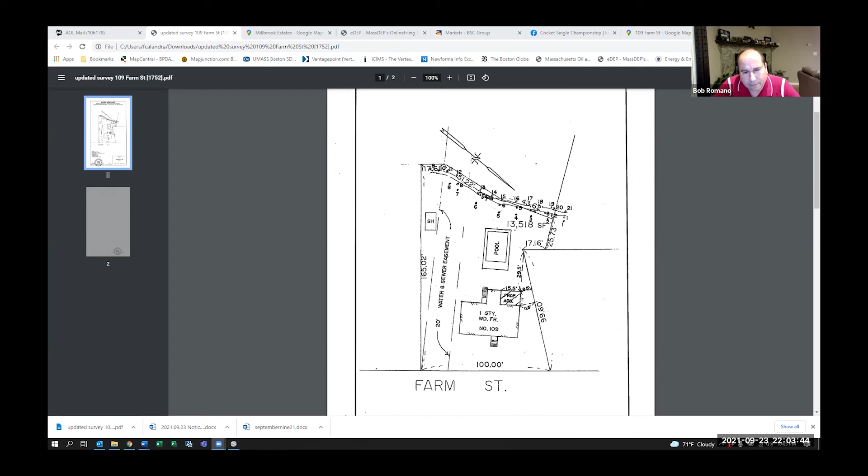how close the pool is, or even the relationship of the pool to the house. That would be another thing I'd like to see. Yeah, and if they have flags, tell them to put the 25-foot no-disturb zone on there and the wetland buffer zone, the BVW buffer zone. Those need to be on the plan. You have to identify all the resource areas.

So I guess the answer is no. Well, the other thing might be to have Elaine go out and verify it, but I don't know if I want to do that with no filing. Why go to that degree yet? They're just checking a plan.

Your point, Jim, is that for us to go out, we have to accept the filing. And once we accept the filing, we can't complain about the filing being deficient. That's right. Yes, we can complain about the filing, but we may provisionally accept it for purposes of filing, and then just get another plan?

Judy, can I ask you a question? Why are we being asked this question? We shouldn't be asked this question. They should just follow the regulations. I think it's because they don't want to pay for a full plan. There are requirements for a plan for a Notice of Intent. Just refer to that section. We shouldn't be asked to rule on this.

Okay, Rebecca just wanted to check in. So it sounds to me as if you do not find the plan acceptable. You want another plan that shows the distance from the pool to the stream. You want to know when the NOI is filed whether or not they cut down any trees, and where. And you want to see the 25-foot and 100-foot buffer zone and all other resource areas. So tell them that's what the new plan should show.

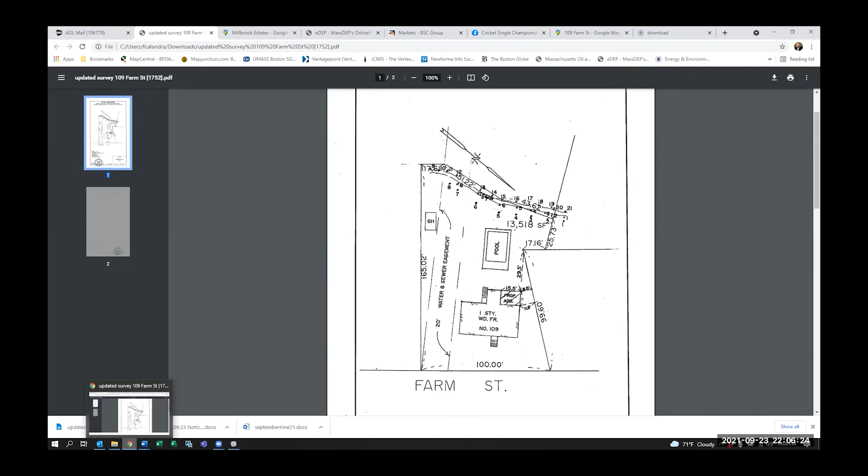All right, I got it. Would it be appropriate to ask if they've cut down trees prior to the pool? Yes, we were asking that question.

All right, so I have another one that came in late this afternoon from an attorney requesting a certificate of compliance for 19 Kathy Lane. It dates back to 1990, a project done by the town of Wakefield where they extended a 16-foot pipe on an easement across 19 Kathy Lane and did some regrading to even out the slope. There was no requirement under the order for an as-built plan. I went out there this afternoon and not surprisingly, it is completely and thickly revegetated. So in my opinion, there's no reason why the certificate of compliance couldn't issue.